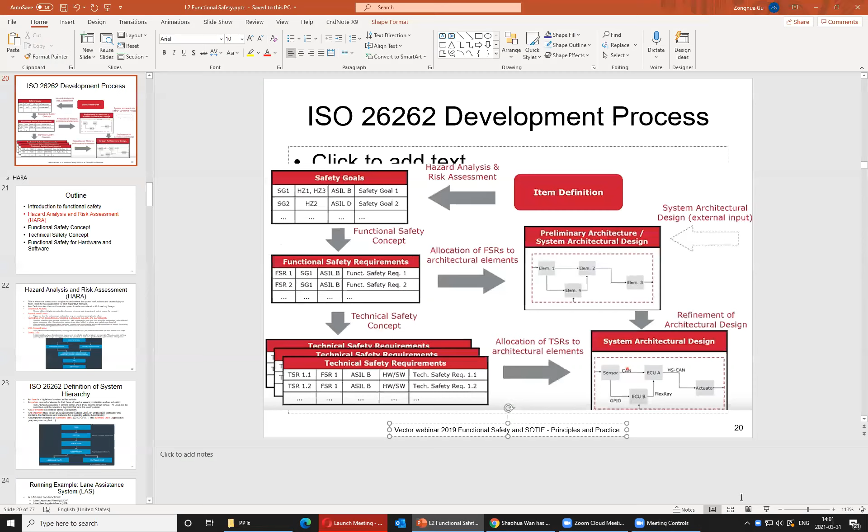Okay, so let's start lecture number 2. There's a little bit left from last lecture, lecture number 1.

First, we set up an exam time. If you go to the TimeEdit schedule, I added May 31st as the exam date, 9 to 11. And August 19 is the re-exam date. So if you did not make the exam in May, you may choose to test in August. The other classes are not entered in TimeEdit because it's quite tedious - you'd have to enter each one manually by hand. I think it's not necessary as long as you know the time is Monday, Wednesday. So I just added the 2 exam dates.

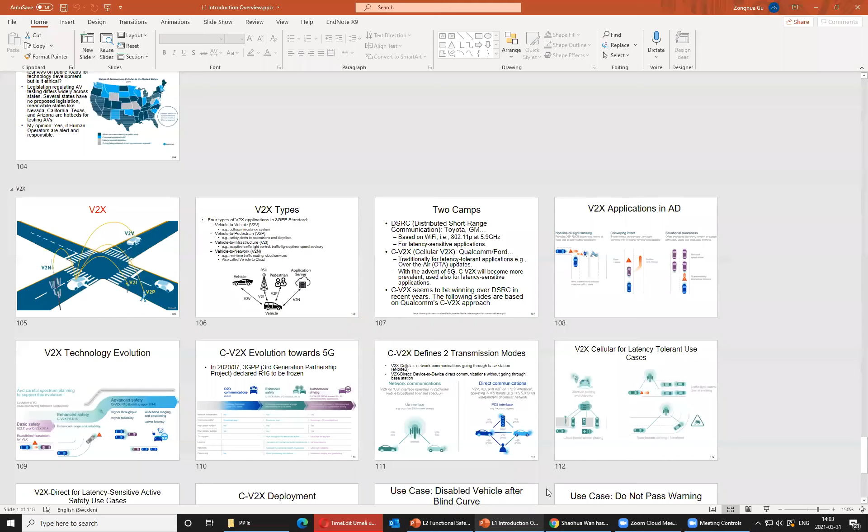So, are there any questions on the exam or last lecture's material? Okay, so let's continue.

We have one last section in introduction and overview, that is V2X. So V2X communication - in the 3GPP standard, there are 4 types. One is vehicle-to-vehicle communication, for example collision avoidance systems. One is vehicle-to-pedestrian, V2P communication, for example safety alerts to pedestrians and bicyclists - specifically vehicle to mobile phone, mobile device.

Vehicle to infrastructure, that's V2I communication - for example adaptive traffic light control, traffic light optimal speed advisory. So for example, if there's a road where in one direction there's a lot of traffic but in the other direction very little traffic, then with a normal traffic light that switches periodically, the busy road will get interrupted periodically. But if you have V2I communication and change the lights only when the other direction has a vehicle coming, you can be much more efficient.

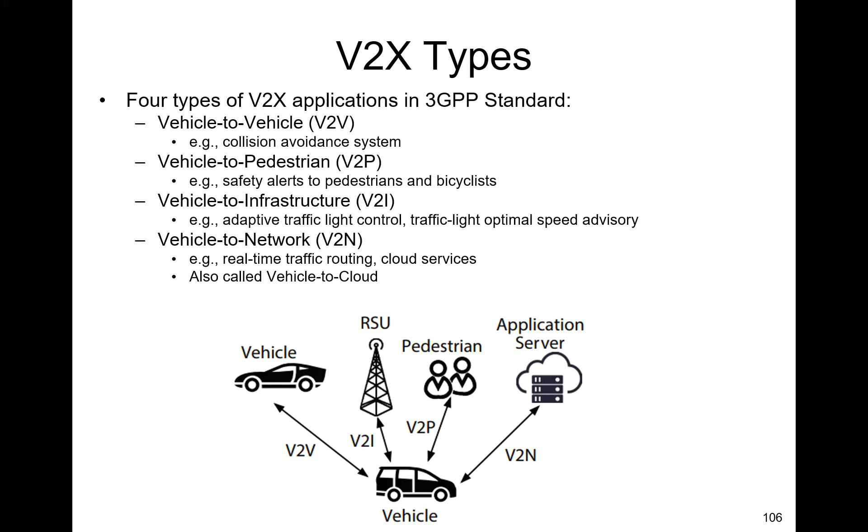There are essentially 2 camps in V2X. One is based on Wi-Fi, which in IEEE standard is 802.11p, operating at 5.9 gigahertz. The standard is called DSRC, Dedicated Short Range Communication, mainly adopted by Toyota and General Motors. Because it's point-to-point communication without going through a base station, it's useful for latency-sensitive applications.

Cellular V2X, CV2X, is mainly supported by Qualcomm, Ford and others. Traditionally it's for latency-tolerant applications, for example over-the-air updates - updating your vehicle's software from over-the-air software patches. These can be done non-real-time, maybe while the car is parked.

So traditionally, you think of CV2X as slower because the communication goes through a remote base station. Think of your own mobile phone - if it's using a cellular connection, then all the signals go through a remote base station in a cellular network. Whereas if you're in a room with Wi-Fi, the communication is local.

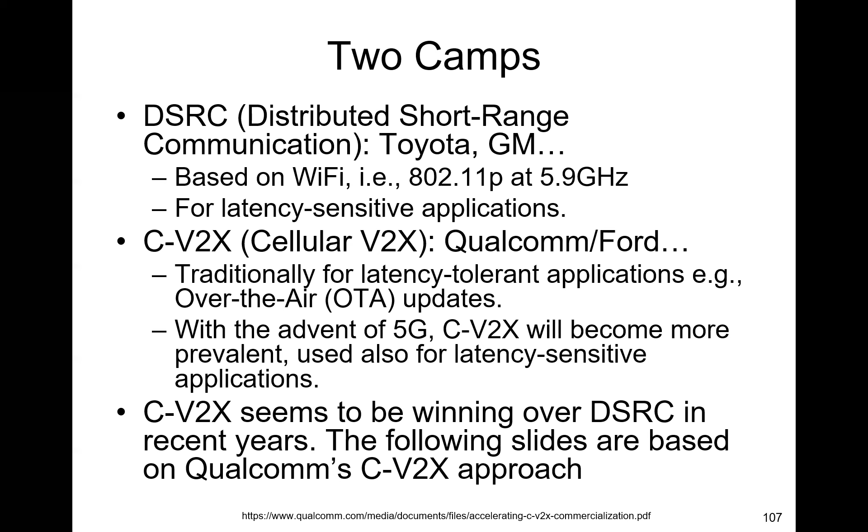The following slides are based on Qualcomm's CV2X approach. In autonomous driving, V2X can have many applications. One is non-line-of-sight sensing, which provides 360 degree NLOS awareness, and works at night and in bad weather conditions.

That's when you cannot see the other vehicle. Suppose this is your ego vehicle, and there's another vehicle, maybe there's a tall building in the corner that prevents you from seeing that vehicle directly. Or maybe a pedestrian crosses the road suddenly - they're called vulnerable road users. If you have V2X communication, you can receive an alert, either V2V or V2P, and then either the driver or the automated vehicle itself can take emergency maneuvers.

The other application is conveying intent - sharing intent, sensor data, and path planning information for higher level of predictability. Here, the blue car is your ego vehicle, and there's a road hazard, maybe some obstacle on the road that you cannot see directly, but the car in front sees it and makes a sudden lane change. Without V2X communication, you'd have to make a sudden lane change too. But with V2V communication, the front vehicle can tell your ego vehicle there's an obstacle ahead and you can change lanes early.

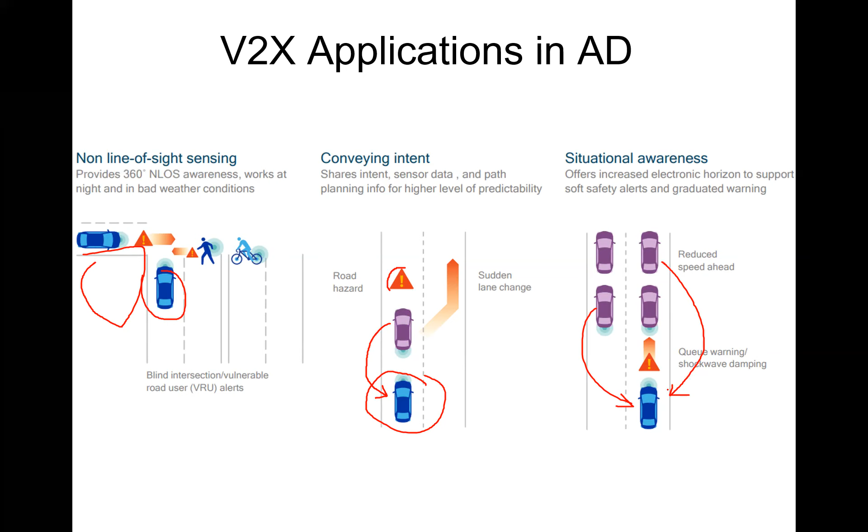V2X technology evolution started with basic safety messages - basically collision avoidance over either Wi-Fi, that's the 802.11 standard for Wi-Fi, or CV2X release 14. Enhanced safety, that's CV2X release 14/15, features enhanced range and reliability - the range is extended to maybe over 100 meters and more reliable. Then release 16 offers advanced safety, higher throughput, higher reliability, wideband ranging and positioning, and lower latency. This is essentially 5G.

Last year in July, the 3GPP, the third generation partnership project - essentially a consortium of industry, telecom industry, and technology companies - declared release 16 to be frozen, finalized. This is a table comparing release 12/13 to 14 up to 16. Release 12/13 is for basic device-to-device communication - it has limited network independence, limited high speed, no high density, and so on.

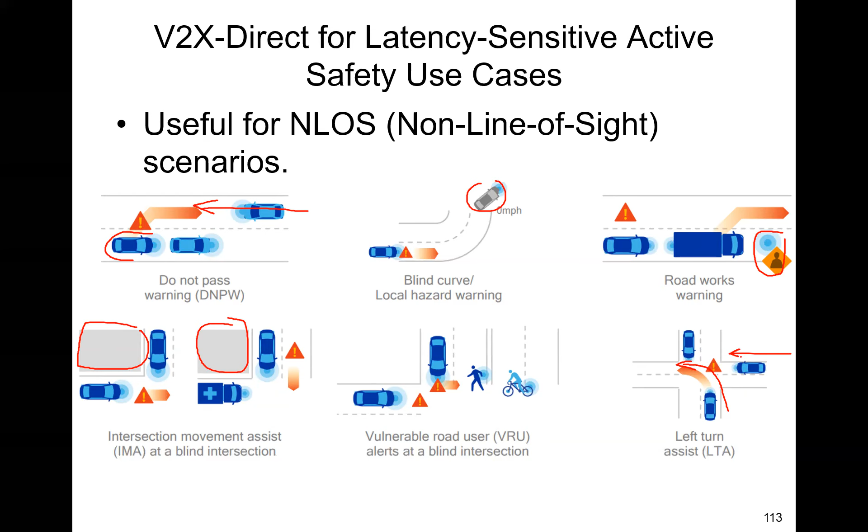So all of these are non-line of sight scenarios. So for deployment, it's a combined use of roadside units.

For example, traffic lights, these are traffic lights, with direct link interface for V2X direct. So this purple interface is the roadside units with direct link, also called PC5 interface. It allows direct communication between the vehicle and the roadside unit, so between this and this.

And 4G, 5G base stations for V2X cellular, benefiting from cellular network densification in 5G with smaller and denser cells. So the green interface is the 4G, 5G small cells with UU interface. That's more of a traditional base station, pretty tall, on a tall pole. And then in 5G, you may have so-called nano base stations, very small base stations spread densely in the area.

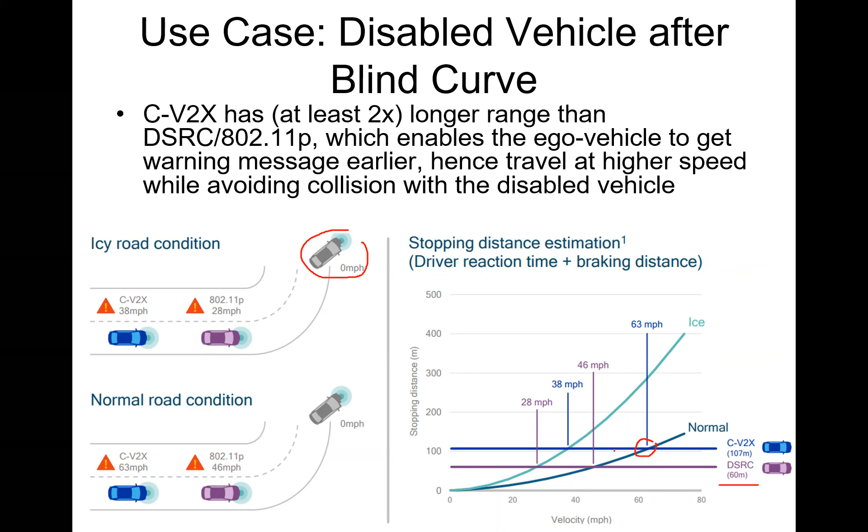So in conclusion, in summary, 5G accelerates AVs. For autonomous vehicles, you can have V2X wireless communication as an additional sensor, in addition to camera, LiDAR, and radar. You may have 3D HD maps with V2 cloud connectivity. You may have heterogeneous connectivity with cellular, Wi-Fi, and in-vehicle CAN Ethernet, and this enables onboard intelligence.

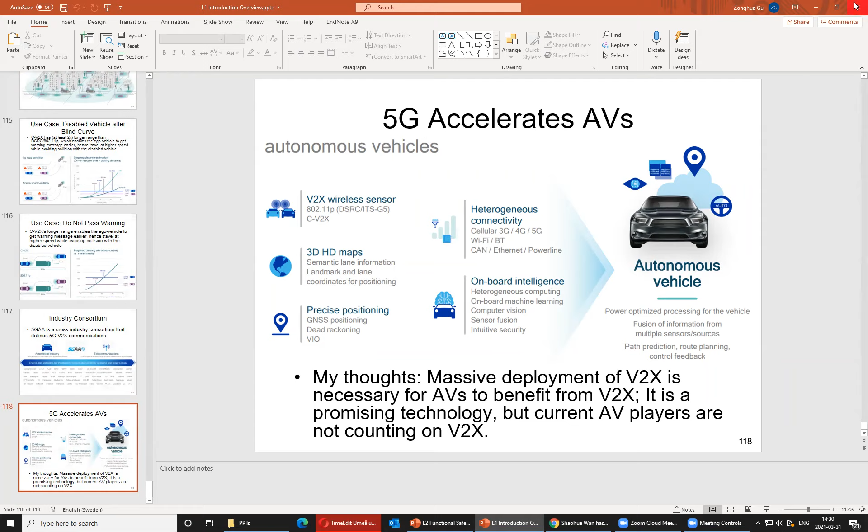Okay, so let's close this first lecture and move to lecture 2 on functional safety.

For this lecture, I took a lot of material from Udacity's self-driving car engineer nanodegree. So let me do a little advertisement because I use their material.

Udacity has this nanodegree program for self-driving cars. It's not free, it's actually quite expensive, $2,000. So it's pretty well known in industry. If your goal is to become a self-driving car engineer, this course can be very useful because many employers know it. They often ask applicants, did you take the course or not? So because so many people took it and got a job, this course is pretty well known in industry.

From my perspective, I looked at the course material, and it's very practical, very hands-on, but it's also a little bit out of date. It addresses many classic techniques in terms of computer vision, sensor fusion, planning, control, and so on. But it lacks adequate coverage of machine learning and deep learning, the latest topics. So if you're aiming to get practical knowledge about what engineers really do in industry, this course can be very useful. But if you're a PhD student or doing research, maybe these covered topics are too old.

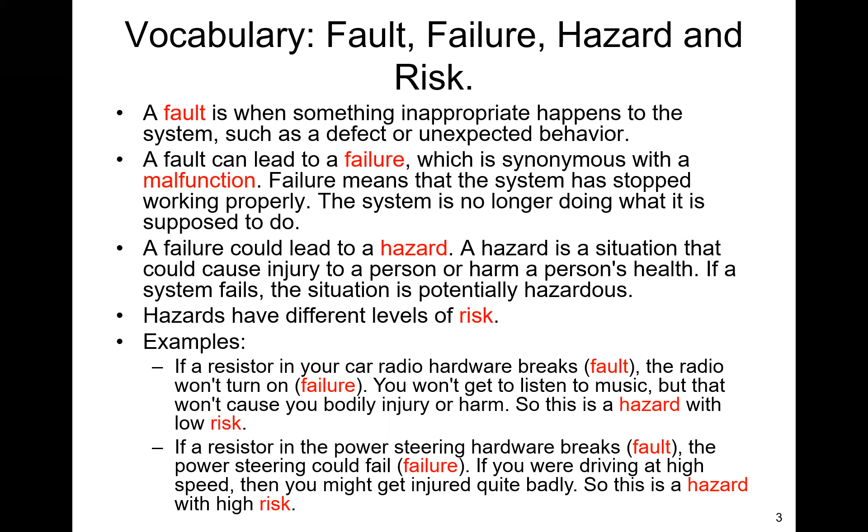The notions of safety in the automotive context—there are many notions. One is functional safety, which is the topic of this lecture. It's when hardware or software is not working according to specification. One is safety of intended functionality, SOTIF. That's a hazardous situation due to lack of specification. So functional safety is more related to traditional hardware-software failures, if a resistor is broken or there's a soft error due to failing, aging hardware, whereas SOTIF is more relevant to AI and machine learning.

For example, if Tesla's car cannot recognize a white truck and hits it, that's a failure in the SOTIF sense, because the hardware in the car did not fail—it's the function that's not working properly for a given input. So I will mainly discuss functional safety in this lecture, but I'll also briefly mention SOTIF at the end, because SOTIF is relatively new, whereas functional safety is very old, way before autonomous driving. But SOTIF was discussed to respond to the new requirements due to autonomous driving.

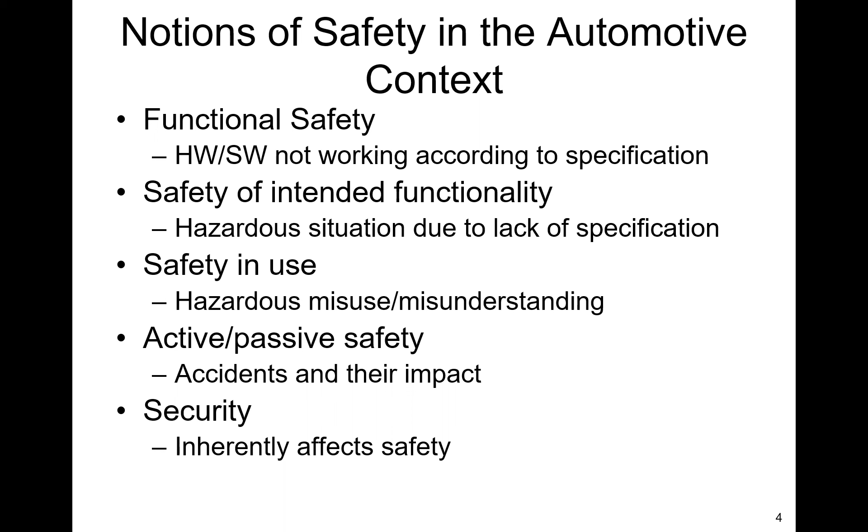Functional safety comes from a branch of systems engineering called requirements engineering. It separates requirements into functional and non-functional requirements. Functional requirements say what your system is supposed to do, in the form X system shall do Y.

You see the word 'shall' a lot in the functional safety literature. For example, the turn signal system shall turn on an indicator light telling the driver that the system is active. That's one example of a functional requirement.

Whereas a non-functional requirement addresses how the system should behave, for example how reliable is the system, with the form X system shall be something. For example, the turn signal system shall be available when the vehicle ignition switch is in the on position.

So it doesn't specify the function of the turn signal system, only its availability at a given time. So it's not a functional requirement, but a non-functional one.

Functional safety looks at what happens when the system does something it was not supposed to do, which is called a malfunction. So you'll be adding new engineering requirements to the vehicle design in order to ensure safe systems.

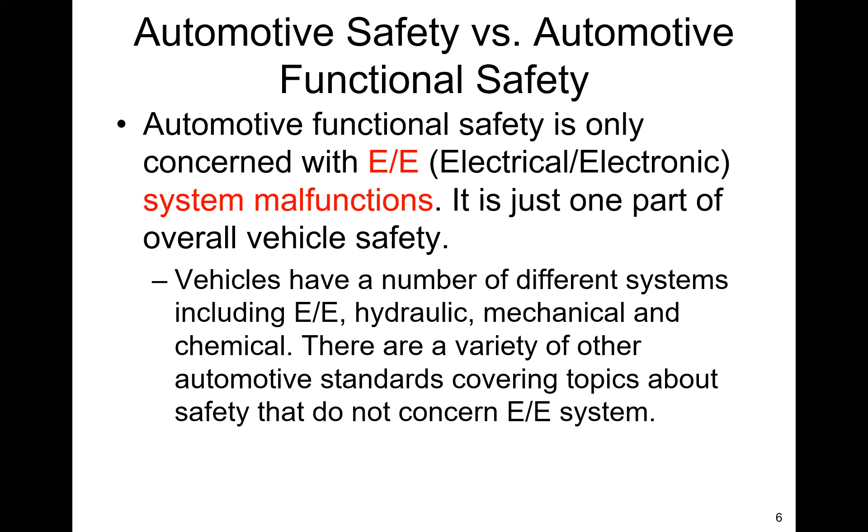Functional safety does not look at nominal performance. Nominal performance issues can lead to safety problems, but nominal performance is not part of the functional safety standard.

For example, nominal performance of the automatic braking system could be: a vehicle traveling at 60 miles per hour should come to a complete stop in 5 seconds. Whereas functional safety does not determine whether or not the vehicle brakes within 5 seconds.

It looks at malfunctions, such as if the braking function is not engaged when it's supposed to, or if the braking function is engaged when it's not supposed to, or if the system is braking too hard, causing injury to the driver.

It's not about the quantitative performance, but about malfunctions, something that doesn't work.

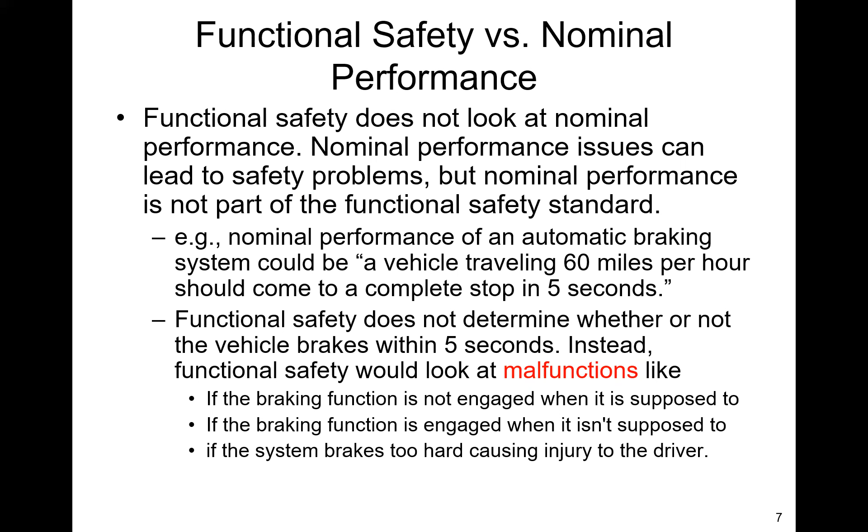So here's a quiz. Which of the following is part of a functional safety analysis? First, the mechanical seatbelt restraint system could fail and the passenger would be injured in an accident. Second, testing to see if the backup camera actually meets its technical specifications of a depth perception of 20 feet, and so on. So the answer is number 3.

There's a potential that a software error could cause the parking brake to engage at high speeds, so it's a malfunction of the EE system. Whereas for the first one, it's a malfunction of a mechanical system. For the second one, it's a performance specification of the camera system. The camera system is part of the EE system, but this particular statement addresses the performance, not the malfunction.

Number 4, the car battery might catch on fire because of a chemical reaction. So it's a chemical subsystem, not the EE subsystem.

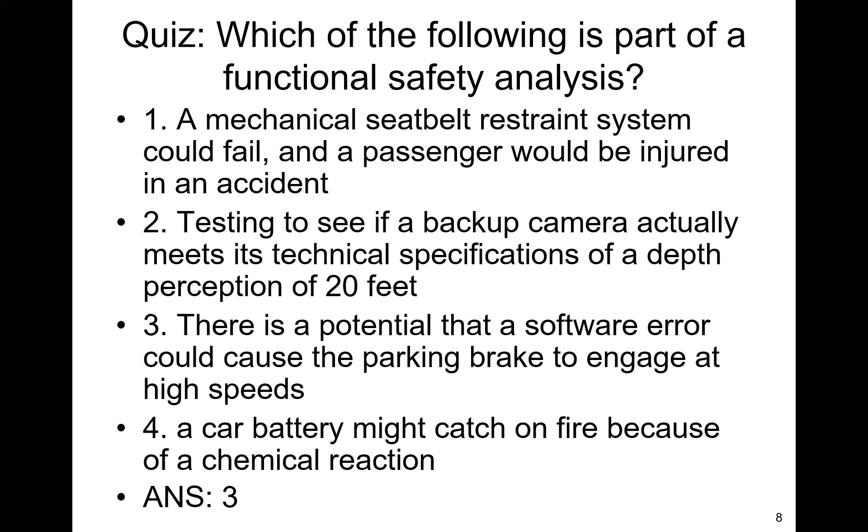So in functional safety analysis, safety is defined as absence of unreasonable risk. Functional safety analysis identifies high-risk situations and lowers risk to reasonable levels. It has 3 steps.

One is to identify hazards in the passenger vehicle's EE system that could cause physical injury or damage to a person's health, and evaluate the risk of the hazardous situation so that we know how much we need to lower the risk. And finally, via systems engineering, prevent accidents from occurring by lowering risk to reasonable levels.

So what level of risk is reasonable? It really depends on society's current threshold. For example, the history of seatbelts provides a great example of how society measures risks.

It took almost a century for countries to require seatbelt use. The automobile was invented in 1885 by Benz, and seatbelts started appearing in the 1920s. In the 1950s, car companies offered seatbelts as optional equipment. And finally, in 1968, the United States passed laws requiring all vehicles to come with safety belts.

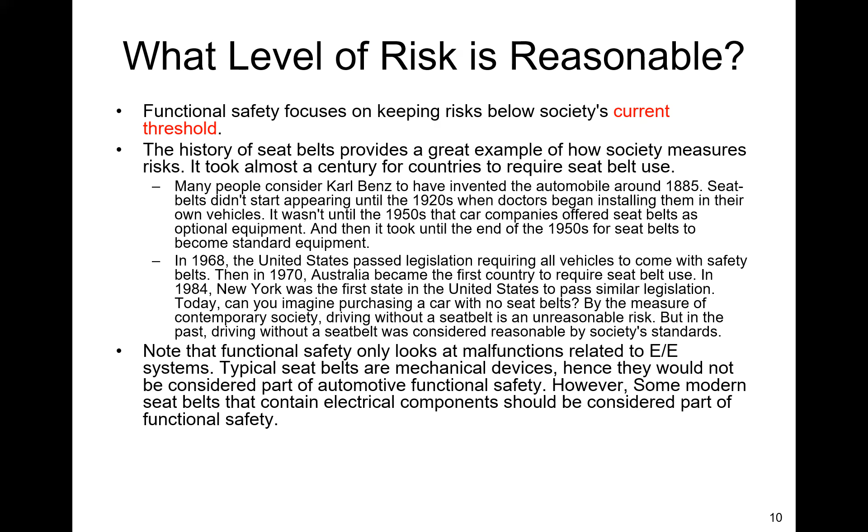Typically seatbelts are mechanical systems, so they're not part of the functional safety coverage, but some parts of the seatbelts may be electronic, so they should be considered as part of functional safety.

So identifying hazards, there are three general causes for accidents. One is human error. The National Highway and Transportation Safety Administration estimates 94% of car accidents in the USA involve human error. One is technology error, for example, software bugs, hardware failures, and so on. And one is human technology interaction error.

So whenever a human and a machine share control of a vehicle, of a system, extra care must be taken when evaluating safety. The boundary between what the human is supposed to do and what the machine is supposed to do needs to be clear. Drivers need to understand the warning signals coming from ADAS systems. Interfaces need to make it clear when the vehicle expects us to take over.

Some companies, such as Waymo, have argued that low levels of automation are not safe. Since it's unrealistic to expect drivers to keep their hands on the steering wheel and be prepared to take over for long durations of time. So, for example, Tesla has L2 automation, and in their user's manual, they say that the driver must be alert and be ready to take over at any time.

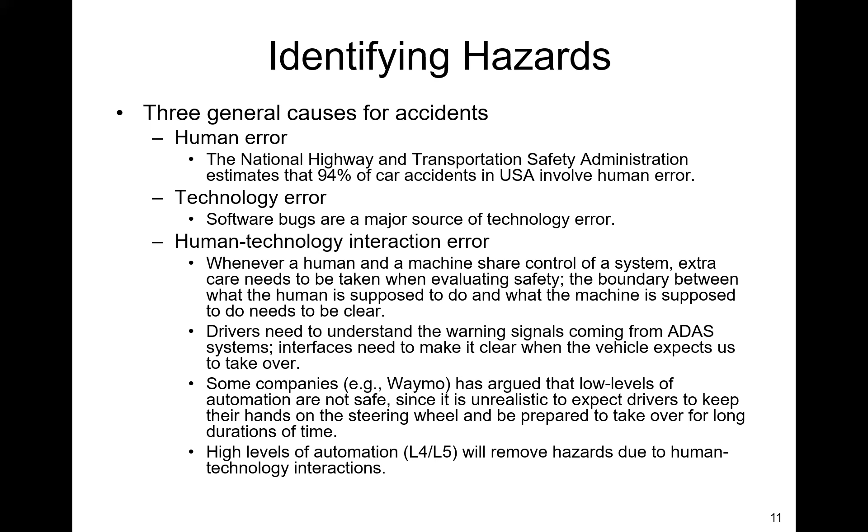So the ISO 26262 standard, which is the functional safety standard for automotive systems, defines 4 ASILs, automotive safety integrity levels, A to D. D represents a hazardous situation with the highest risk, whereas A represents lower risk. There's one more level of risk below A called QM, quality managed, which means that development of this subsystem according to accepted quality principles is sufficient to reduce risk.

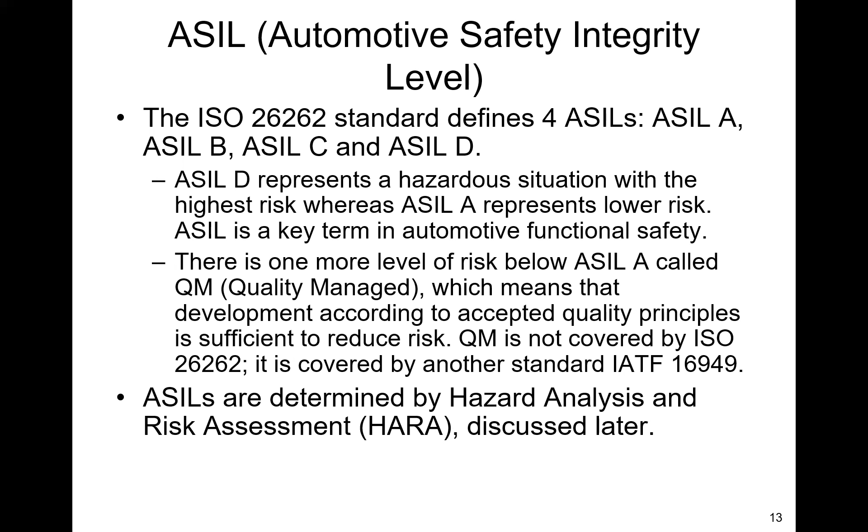So how do you evaluate risk? It's defined in the functional safety context as probability of occurrence times severity of the harm. Probability of occurrence refers to how often a driving situation occurs. For example, driving on a snowy mountainside road has a relatively low probability of occurrence, whereas for city driving, the probability is high.

Well, unless you live in the mountains, but I guess most of us live in the cities. So severity of harm refers to how bad the injury is. For example, a power steering malfunction may cause fatal injury for driving on a snowy mountainside with a severity of 4, but unlikely with no injury for city driving with a severity of 2 due to the low speed. So therefore, risk of power steering malfunction for driving on a snowy mountainside is calculated as 2 times 4, which is 8.

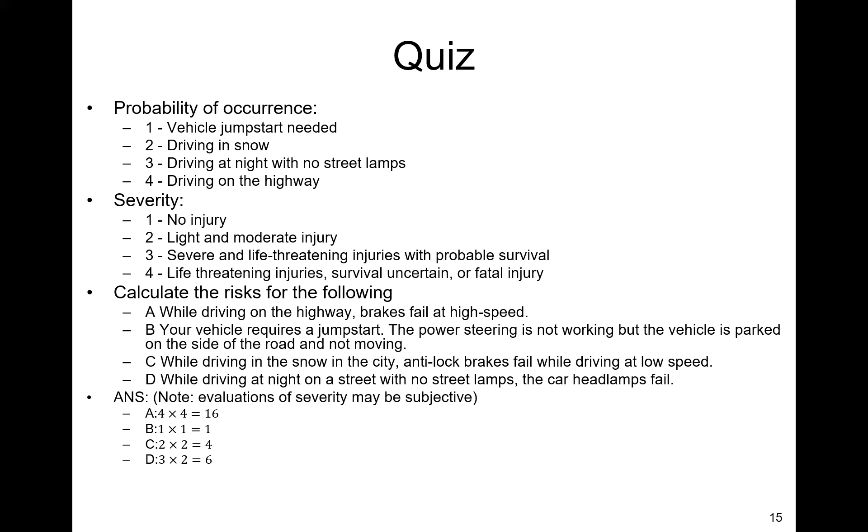So, reducing risk with systems engineering. This is the V model for systems engineering, from requirements engineering on this side, to systems architecture design, allocating requirements, testing and verification, and finally system integration. This is the classic V cycle, especially if you work in the automotive industry. As an engineer, you should be very familiar with this V cycle.

The top part of the V represents the entire vehicle as a single system. As you traverse down the left side, you focus on smaller and smaller subsystems. As you go up the right side, you integrate your subsystems into larger systems. At the top left, you start from a bird's eye view of the entire vehicle and gradually split into subsystems such as climate control, entertainment system, steering system, braking system, and so on. Then you define requirements and system architecture for each subsystem.

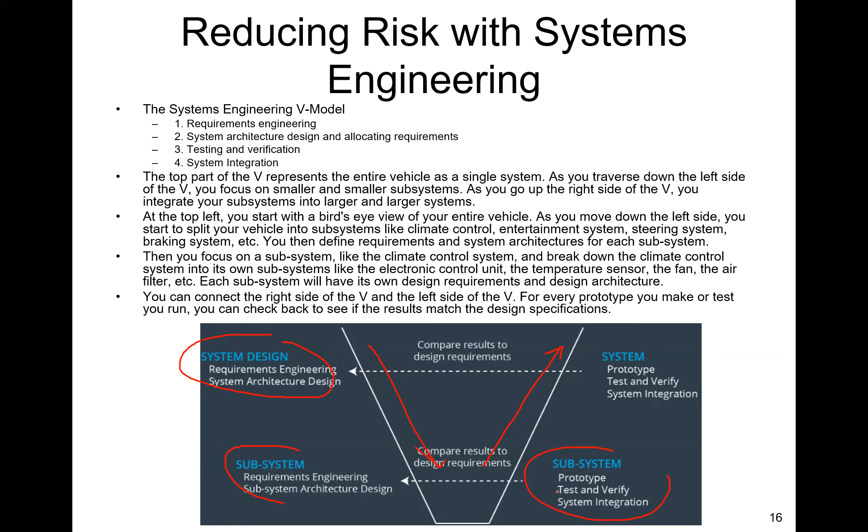Here's another view of the V model. ISO standard compliance is not legally required, but highly desirable. Higher up in the V model represents integrated systems, so you have the flat-down, flat-up, and flat shape.

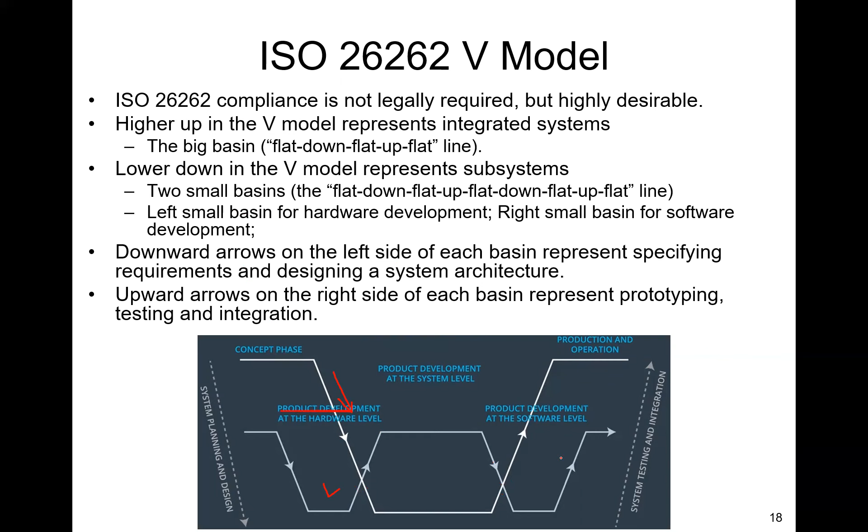You can flatten the V model to a more linear perspective. Here you can see the concept phase, the product development phase, and the after-release-for-production phase.

In the concept phase, you mainly perform HARA, hazard analysis, and then design the functional safety concept. After the requirements are done, you perform actual development at the product development phase, both for hardware and software. Then you perform safety validation and functional safety assessment, and release to production. Finally, after production, you have operation and service, and decommissioning — that is, going to a junkyard.

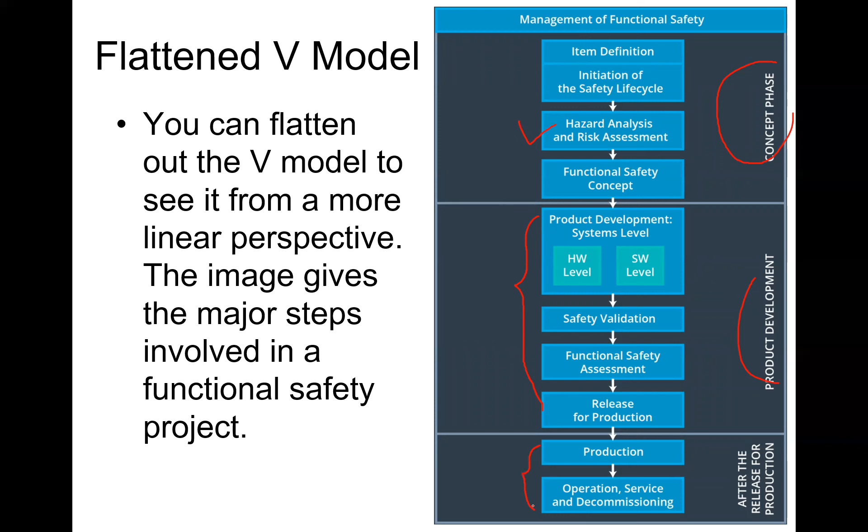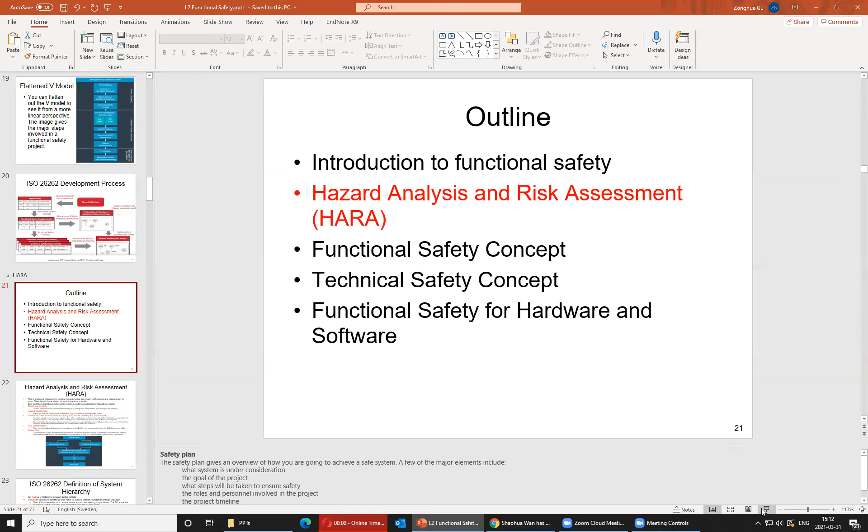So HARA, this is where we brainstorm and imagine hazards where the system malfunctions and causes injury or harm. Then you calculate the risk for each hazardous scenario. It has 5 steps.

One is situational analysis: choose the driving scenario, like driving on a bumpy road, being towed, or driving on a freeway. Hazard identification: identify how the system could malfunction, for example electronic parking brake failure. Hazardous event classification according to exposure, severity, and controllability.

Take a malfunction and think about it under different driving scenarios, like if the electronic parking brake failed while the vehicle was parked on a steep hill. So that could be a hazard. Then calculate the 3 metrics, exposure, severity, and controllability, and determine the ASIL.

ASIL determination. Finally, safety goal: the type of engineering requirement for vehicle functional safety. For example, the electronic parking brake system shall always be engaged when the vehicle is in park on a gradient that's greater than 10 degrees.

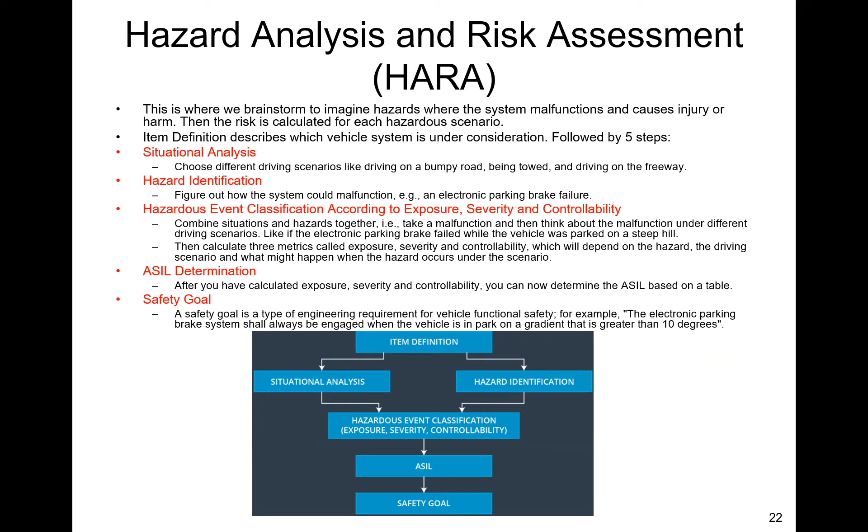So first, some basic terminology. An item is a high-level system in the vehicle. A system is a set of elements that have at least a sensor, controller, and an actuator. For example, the lane assist system, LAS, has 2 sensors: one is the camera, one is the driver steering torque sensor. The ECUs are the controllers, and the actuator is the motor that turns the steering wheel.

A subsystem is a smaller piece of a system. A component, maybe an ECU, an embedded computer that contains the hardware and software for specific functionality. A component consists of hardware parts and software units.

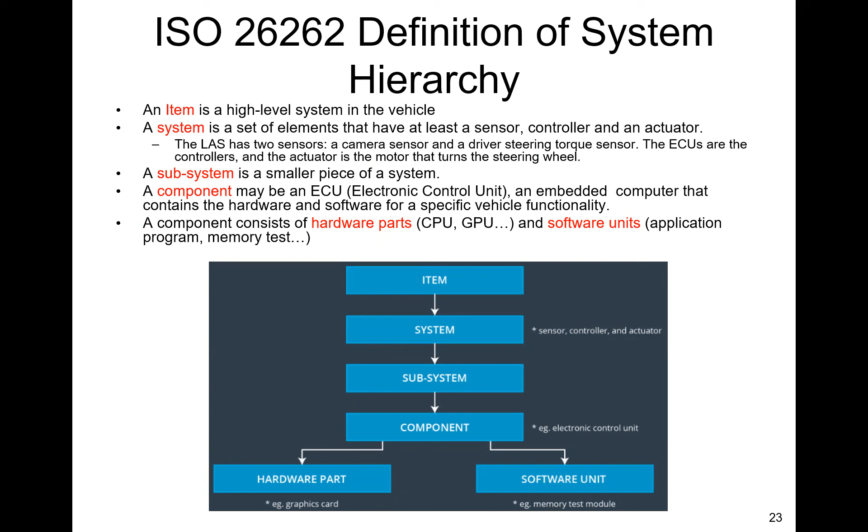So here's an example lane assistance system with 2 functions: one is lane departure warning, one is lane keeping assistance. If a driver departs a lane without using a turn signal, the system assumes that the driver has become distracted and did not mean to leave the lane. Two things will happen. First, the LDW function will vibrate the steering wheel to provide haptic feedback to remind the driver that they're deviating from a lane.

The LKA function will move the steering wheel so that the wheels turn towards the center of the lane in order to stay in the lane. So LKA is more active, it's an active safety feature. You can assume that these engineering requirements come from a product engineering team, and the safety engineer's job is to add extra requirements to ensure safety.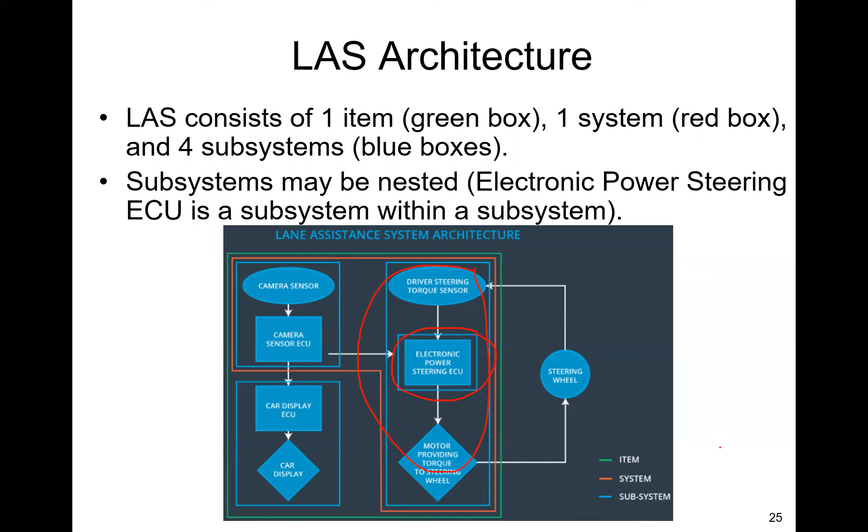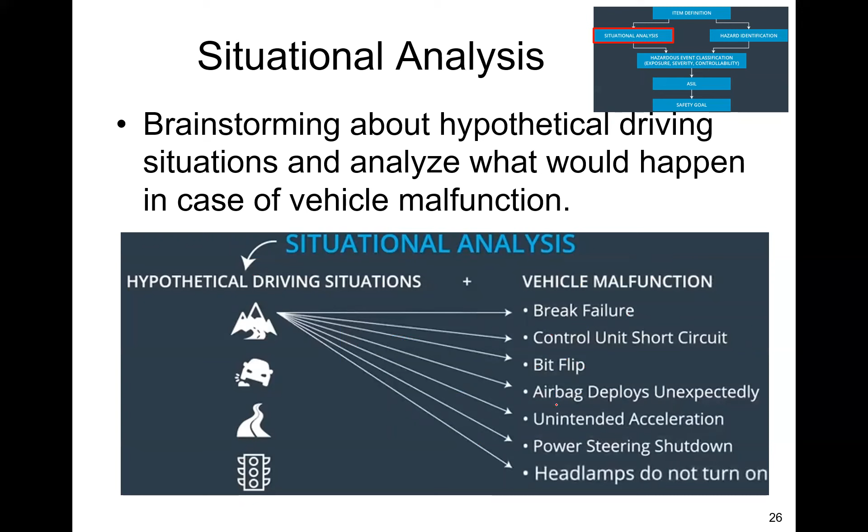So situational analysis, this is where engineers brainstorm about hypothetical driving situations and analyze what would happen in case of vehicle malfunction, for example brake failure, control unit short circuit, bit flip, airbag deploys unexpectedly, and so on. You use a set of predefined guide words to help unify terminology. Here, deviation guide words include function not activated, function unexpectedly activated, function always activated, and so on.

So for example, operational mode, operational scenario, during environmental details, with situational details, and item usage system. You can replace each word in the parentheses with, say, backward driving on city road. So backward driving is operational mode, city road is the scenario, during fog is environmental details, situational details are low speed, and item usage is correctly used system.

So that's one scenario. For our lane assistance example: normal driving on a highway during rain, slippery road, with high speed, and correctly used system.

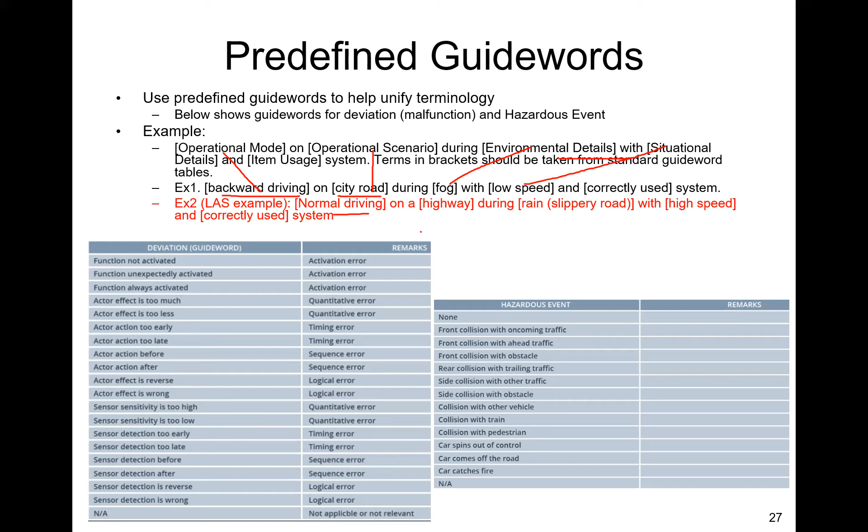The function for LDW is that it should apply an oscillating steering torque to provide the driver haptic feedback. So if you have this function in your car, if you deviate from your lane, your steering wheel will vibrate and remind the driver.

The malfunction is that the actor effect is too much. That is, when the oscillating torque is too high, the oscillation can actually cause the vehicle to veer and collide with other vehicles. So the haptic feedback being too large can affect the driver's ability to steer as intended, causing loss of control and collision with another vehicle or road infrastructure. In summary, LDW applies too high an oscillating torque to the steering wheel above the limit. So this is a hazard.

For lane keeping assistance, this function moves the steering wheel so that the wheels turn towards the center of the lane to keep the vehicle in the lane. Malfunction is when the driver takes both hands off the wheel - that's when the driver overtrusts the technology. LKA is not designed for that; it's designed for assisting the driver, not replacing the driver.

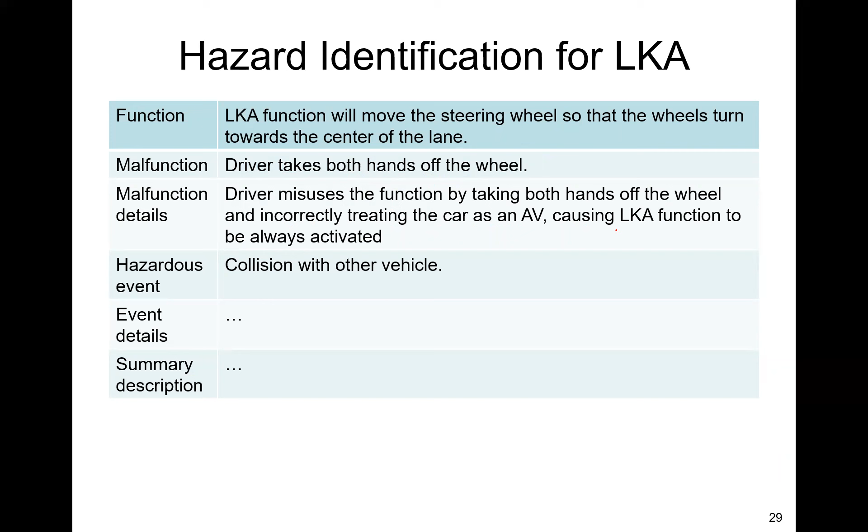In the ISO 26262 standard, risk is defined as risk equals severity times exposure times controllability. Severity is the same as the severity we discussed before. Exposure corresponds to probability of occurrence. Controllability is new in ISO 26262 compared to traditional functional safety - it measures how likely the driver could regain control of the vehicle.

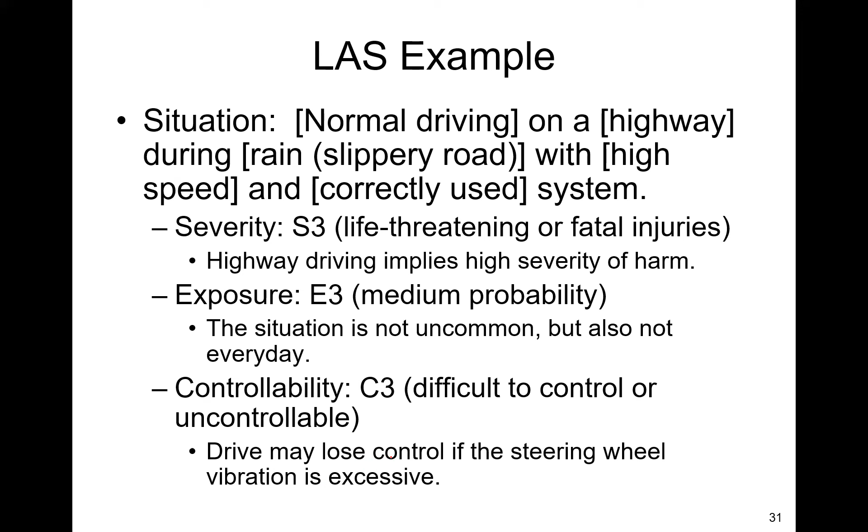For example, normal driving on a highway during rain, slippery road with high speed and correctly used system: severity is S3, because highway driving implies high severity of harm. Exposure is E3, medium probability - not uncommon, but also not every day. Controllability is C3 - a driver may lose control if the steering wheel vibration is excessive. Then you determine the ASIL level of the LDW function as ASIL C, because there's a table in the standard mapping S3, C3, and E3.

So you may look at other driving scenarios. For example, driving on a wet road on a city street at low speed. Now you can determine severity as pretty low, exposure is medium, and controllability is C3 - you may lose control. But because the severity is low, the ASIL level, checking the table, is A. So the risk has gone down due to the low speed.

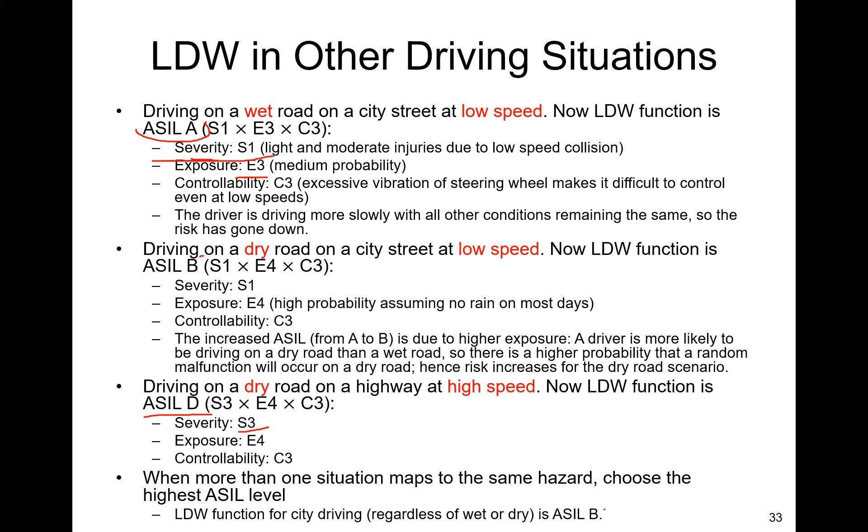It's important to notice that ASIL is not equivalent to importance. A high ASIL function is not necessarily more important than a low ASIL function. And importance is not even a formally defined concept in the standard.

Consider two safety functions. Safety function 1 is ASIL-C due to severity 2, exposure 4, and controllability 3. Safety function 2 is ASIL-B due to severity 3, exposure 2, and controllability 3. So SF2 is assigned a lower ASIL of B due to its low exposure, but its severity is higher than SF1's. So malfunction of SF2 may cause more severe harm than malfunction of SF1, but because it's less frequent, exposure is lower, so it gets assigned a lower ASIL than SF1.

So a low ASIL function may be very safety critical. In general, higher ASIL levels require more analysis and testing to reduce risk to acceptable levels.

A few examples of extra measures include fault tree analysis for ASIL C and D. ASIL D requires hardware failure rate of less than 10 FIT, which is the number of failures expected in 1 billion hours of operation. ASIL B and C require 100, and ASIL A requires 1,000. So software units with ASIL D require more rigorous testing, like MC-DC coverage, whereas ASIL B only mandates DC coverage.

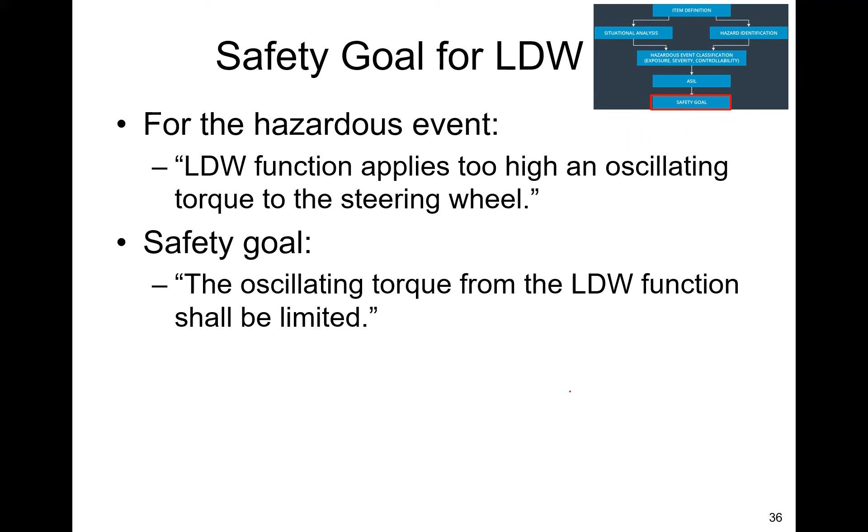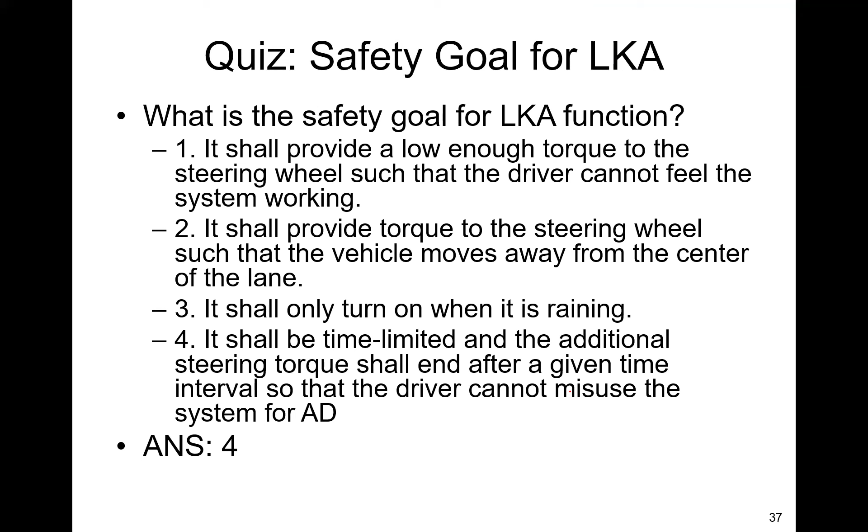Here's a summary of HARA. You start from the malfunction, that is the ABS system failure. Then you perform hazard analysis to identify what unintended situations could happen, for example, a loss of stability. Risk analysis asks: how likely is the hazard to happen? That is the exposure. How harmful is the hazard, the severity of the hazard? How controllable is the system if the hazard occurs? That's controllability.

Finally, you determine the ASIL based on the risk analysis, from A to D. There are a lot of specific methods for the failure analysis, which I will not go into the details of.

So that's HARA, and then the next step is the functional safety concept. In the standard, concept is synonymous with document. So it includes the following steps: derive functional safety requirements, refine the item architecture, allocate functional safety requirements to item architecture, and determine ASILs for the subsystems.

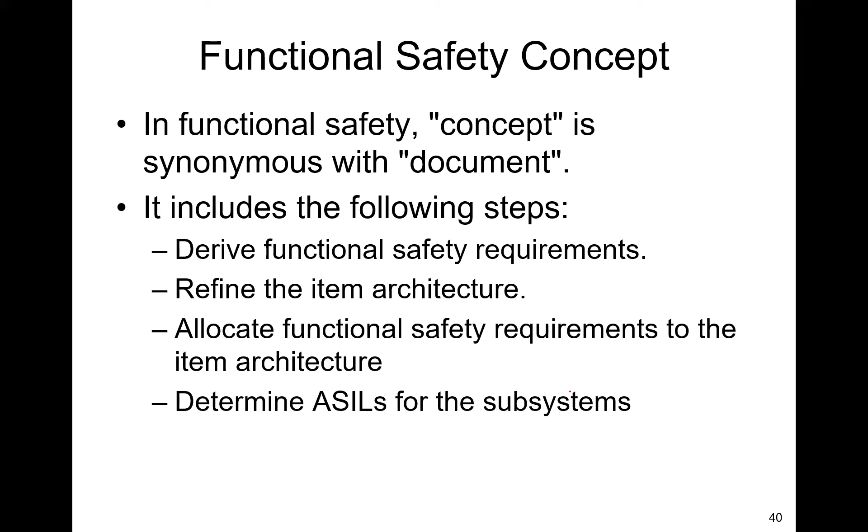Based on information from HARA, we identify 2 malfunctions for LDW. First, the LDW function applies an oscillating torque with very high torque amplitude above limit. Second, it applies the torque with a very high frequency, also above limit. And one malfunction for the LKA function is not being limited in time duration, which leads to misuse as an AD function.

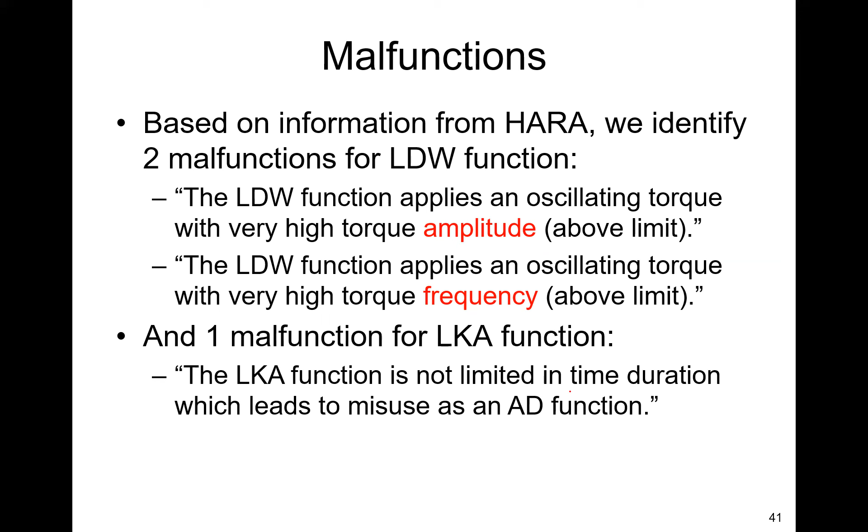And then you can perform a safety analysis to derive safety requirements, identify conditions and causes that could lead to requirements violations, and identify other hazards not identified in HARA. These include failure mode effects analysis (FMEA), HAZOP, FMEDA, FTA, and so on. These are all commonly used in industry for safety analysis.

But we'll just use some basic logic to derive requirements from the goals in this lecture. So functional safety requirements are based on the 2 goals we identified before. First is that the oscillating steering torque from the LDW function shall be limited. Second is that the LKA function shall be time limited, meaning the additional steering torque shall end after a given time interval so that the driver cannot misuse the system for AD.

Based on these 2 goals, we derive a few functional safety requirements. First, the lane assistance item shall ensure that the lane departure oscillating torque amplitude is below max torque amplitude, and frequency should be below max torque frequency. This is more specific than the safety goals — you explicitly define a threshold for amplitude and frequency. So that constitutes safety requirements.

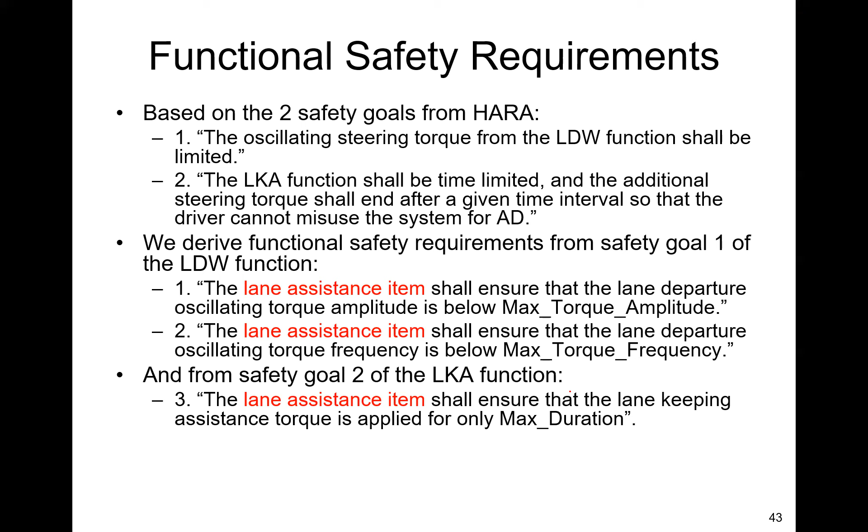So after you have the 3 requirements, you allocate them to subsystems. In this specific case, you allocate the 3 requirements onto the electronic power steering ECU. It shall ensure that the lane departure oscillating torque amplitude is below the max torque, frequency is below max frequency, and lane keeping assistance torque is applied for no more than max duration.

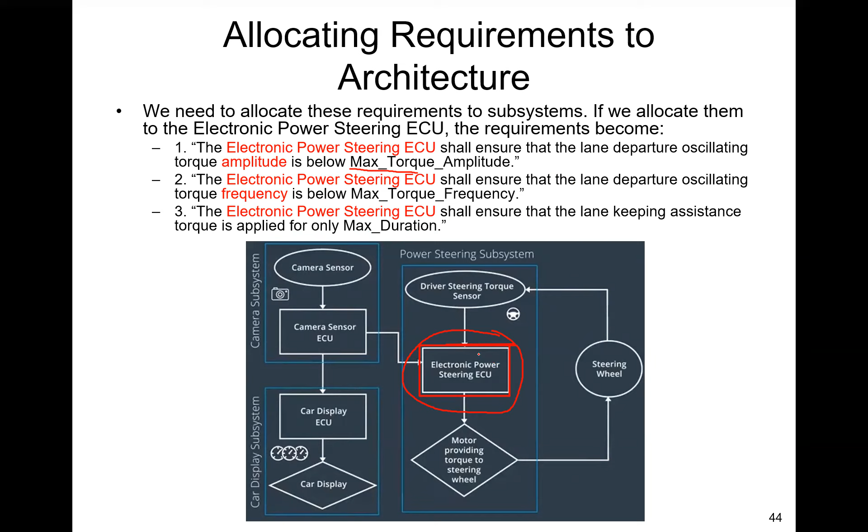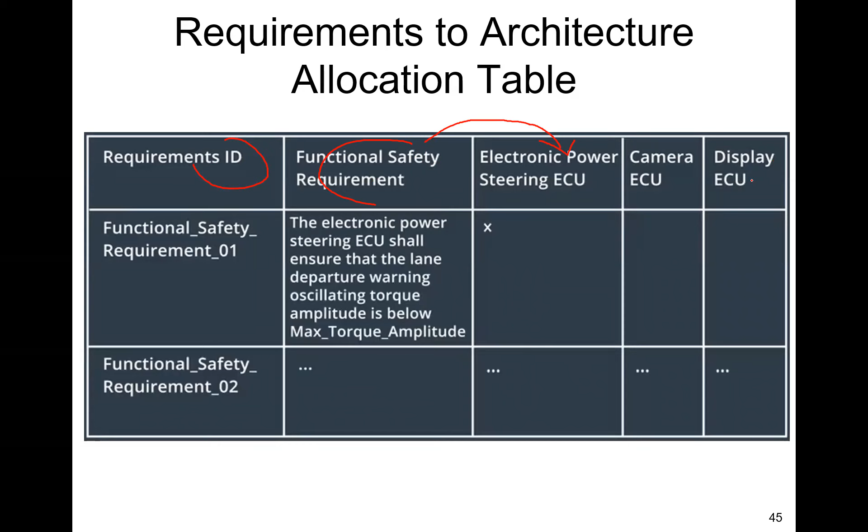So you make a table of which requirement ID, requirement detail is mapped to which element. Could be mapped, in this case, it's mapped to the ECU. You may also have other requirements mapped to camera ECU, display ECU, and so on.

So the 2 functional safety requirements inherit ASIL from the safety goal. We determined that this particular goal is ASIL C from exposure, severity, and so on. Now derived from this safety goal, you have the 2 requirements.

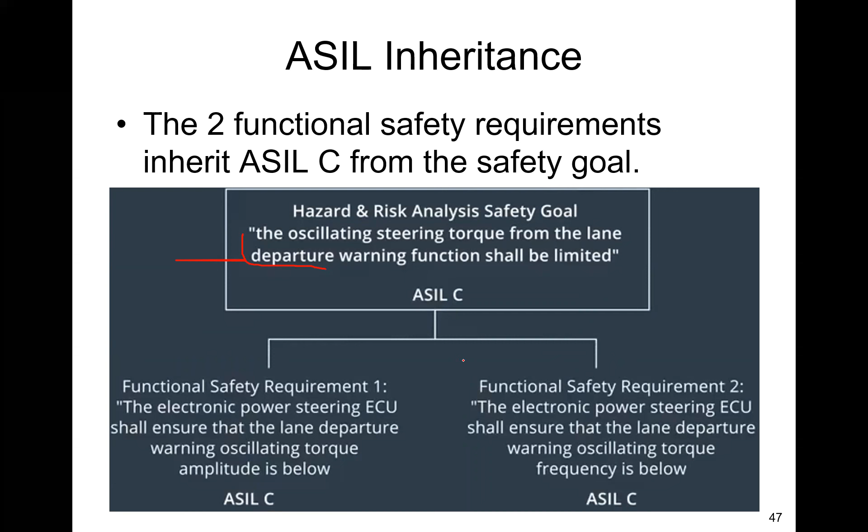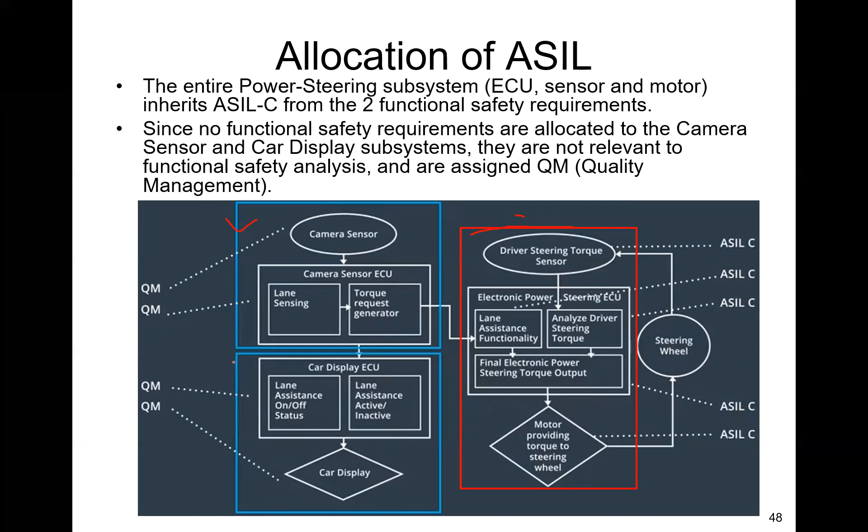They also inherit ASIL from the goal, and then you allocate ASIL to the specific subsystems. So the entire power steering subsystem, this red box here, inherits ASIL from the 2 functional safety requirements, because the functional safety requirement is mapped to the subsystem. It inherits the ASIL level from the requirements. Because in these 2 subsystems, camera and display subsystems, no functional safety requirements are mapped to them, so they're not relevant to safety analysis.

So they can be assigned QM, the lowest level.

So ASIL decomposition can be used to lower the ASIL level. For example, an ASIL D subsystem can be decomposed into 2 redundant ASIL B subsystems. If each ASIL B subsystem has probability of malfunction as 0.01, then the overall system has probability of malfunction when both subsystems malfunction, because they're redundant. When either subsystem works, the whole system works. Only when both fail does the whole system fail. Therefore, the failure probability of the overall system is the probability of both failing at the same time, which is 0.0001, much lower, assuming independent failure modes.

So that's the reason why you can decompose a high ASIL system into lower ASIL subsystems. It's also a motivation for sensor fusion. For example, if you're doing fusion of camera and LiDAR, and you're driving at night and your headlight malfunctions, the camera is no longer working, but the LiDAR still provides you with information. So that's also an example of decomposition into subsystems.

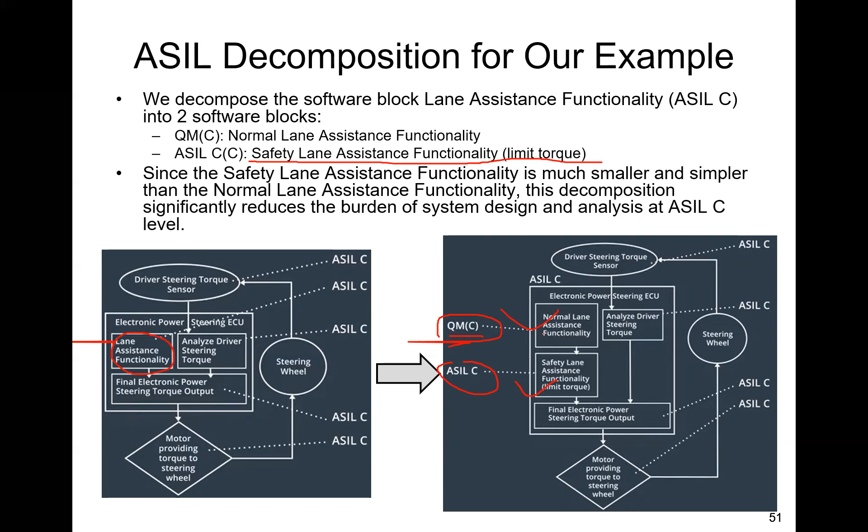From a real-time timing perspective, this fault tolerance time interval refers to the time it takes to detect and react to a malfunction. For example, for requirement 1, the lane departure oscillating torque amplitude is below a max torque amplitude threshold; the fault is when the torque amplitude exceeds the threshold. The safety state must be reached after a time interval FTTI, which equals a diagnostic test interval to detect the fault, plus the reaction time to react to the fault. So FTTI should not exceed the time until an accident could happen, say 50 milliseconds. It obviously depends on the car's speed.

So the warning and degradation concept is a document that discusses how the driver will be warned of a malfunction, and what the system will do to degrade the functionality, to take the system to a safe state and recover from a safe state. So gradual degradation versus turning the system off.

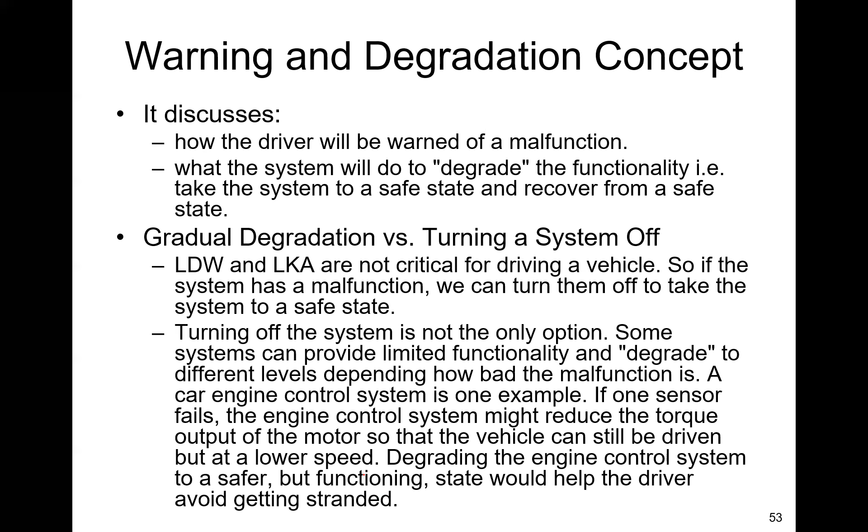For these two functions, LDW and LKA, they're not critical, so we can turn them off. But some systems can provide limited functionality and degrade to different levels depending on how bad the situation is. For example, a car engine control system: if one sensor fails, the system may reduce the torque output of the motor so that the vehicle can still be driven but at a lower speed. This helps the driver avoid getting stranded.

So in case of malfunctions, you may turn on the warning light to give the driver a warning. This is done by adding a separate software block, the lane assist malfunction warning, and a connection of safety lane functionality to it. This concerns the display subsystem.

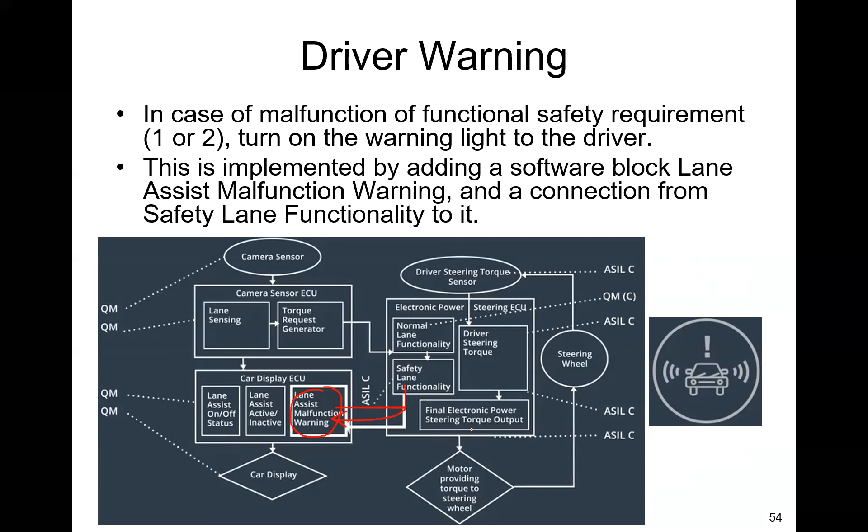So after we have finished with the functional safety concept, the next document describes the technical safety concept. That's when the concept phase is finished and the product development phase starts, and that's when you actually go into the development of hardware and software.

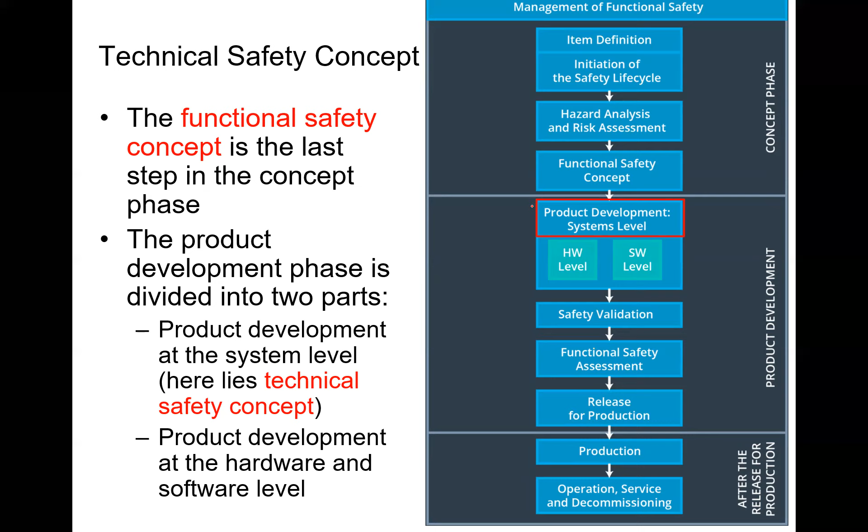So this concept involves two steps. One is turning functional safety requirements into technical safety requirements for each of the subsystems - camera, display, and power steering - and allocating technical safety requirements to the system architecture.

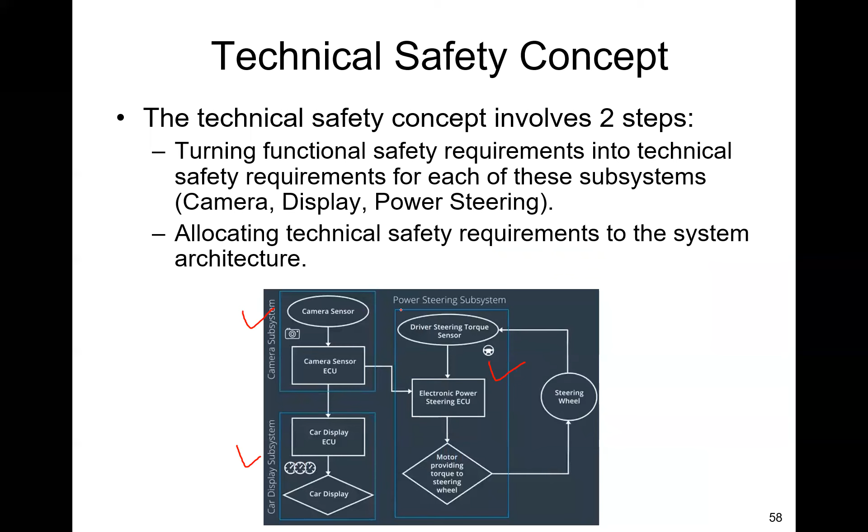So the technical safety requirement in this simple example, the only safety relevant element is the electronic power steering ECU. The other two, display and camera sensor, are not involved. So our technical safety concept will go directly to the ECU level. But in general, you may develop multiple technical safety concepts, one for each safety relevant subsystem. The figure shows how a technical safety concept may be divided into several documents for each subsystem.

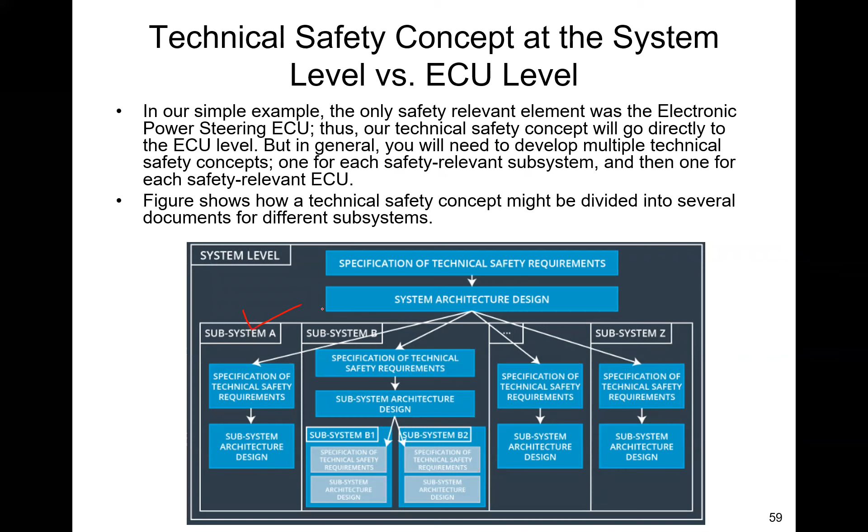So the functional safety requirement we discussed before is abstract and high level. For example, the lane keeping item shall ensure that the lane departure oscillating torque amplitude is below a threshold, whereas the technical safety requirement is more concrete and describes the signal flow and which component is in charge of the functionality. So the LDW safety component shall ensure that the amplitude of the LDW torque request sent to the final torque component is below max torque amplitude.

So this can be implemented by setting the LDW torque request to 0 if it exceeds max torque amplitude. But we're not concerned with implementation yet.

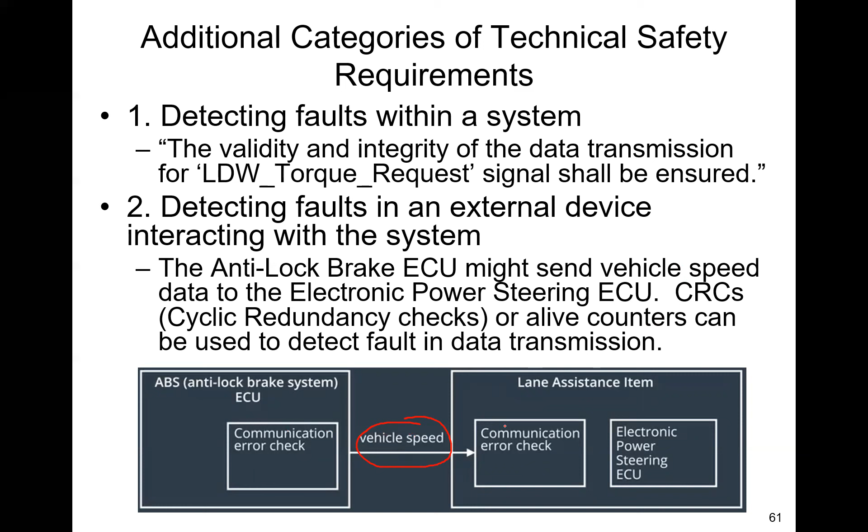And reaching a safe state - for example, as soon as a failure is detected, it shall deactivate LDW and set the torque request to 0.

Number 4 is implementing a warning and degradation concept. So as soon as the LDW is disabled, the LDW safety software block shall send a signal to the car display ECU to turn on the warning light to the driver.

Number 5 is preventing latent faults. So memory tests should be conducted at startup of the EPS ECU to check for any faults in memory. So that's an additional software component.

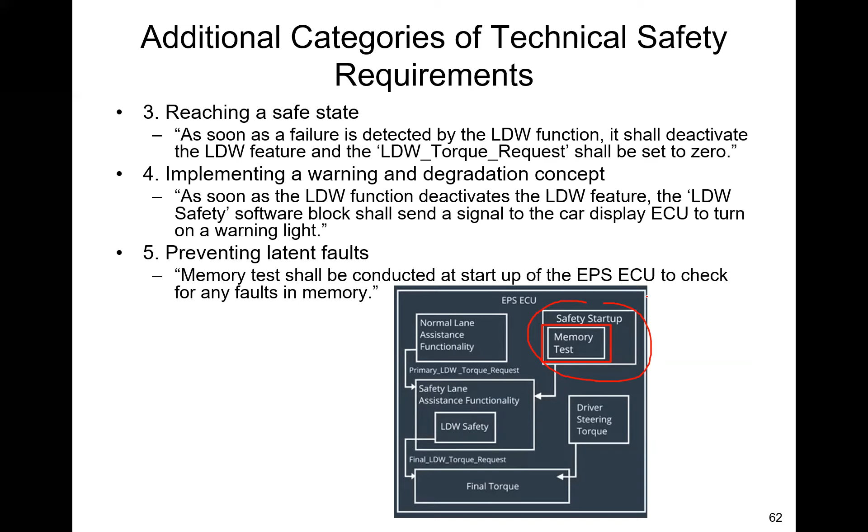So here's an example of a technical safety requirement. First, it inherits the ASIL from the corresponding functional safety requirement, so requirements 1 to 4 are based on the functional safety requirement: the lane keeping item shall ensure that the lane departure oscillating torque amplitude is below a threshold.

Because that FSR is ASIL C, the 4 technical safety requirements are all ASIL C. Requirement number 5, the memory test requirement, is ASIL A, since latent fault detection for an ASIL C requirement can be labeled ASIL A. This is latent fault detection, therefore it has a lower ASIL than the other technical safety requirements. And also you have the FTTI requirement, the fault tolerance time interval.

So after you have identified the technical safety requirements, the next step is to allocate the requirements to system architecture. Requirements 1 to 5 have been allocated to different software elements, such as the LDW safety functionality block, the data transmission, integrity check block, or other relevant blocks.

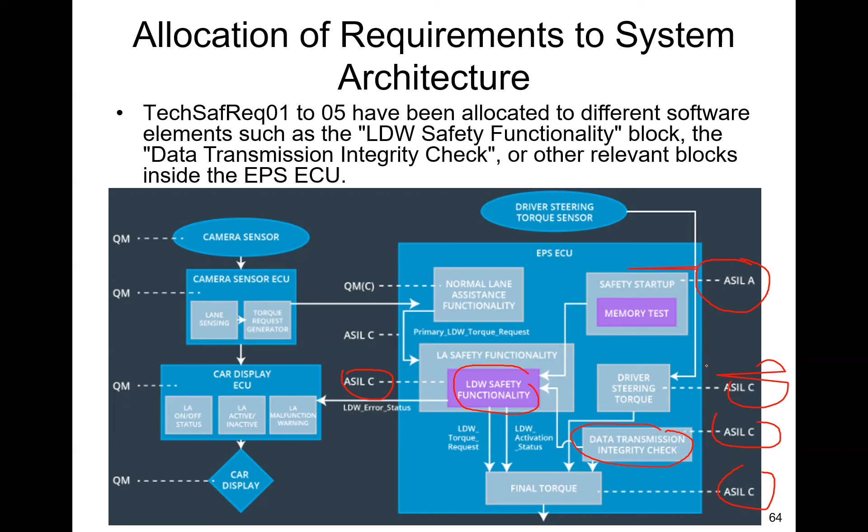So notable points: elements inherit the highest ASIL from the technical safety requirements. So if the same software element provides a functionality to ASIL C and ASIL B functions, the higher ASIL wins, so this software element is assigned ASIL C.

So if an element contains sub-elements with different ASILs, then both sub-elements will receive the highest ASIL, with some exceptions. If a failure in one sub-element will not affect the other sub-element, then the sub-elements can have different ASILs. So internal and external interfaces need to be clearly defined.

Finally, we have functional safety for hardware and software. This is at an even lower level after so much requirements engineering at the functional requirements and the technical requirements stages. Now we are ready to actually develop the hardware and software.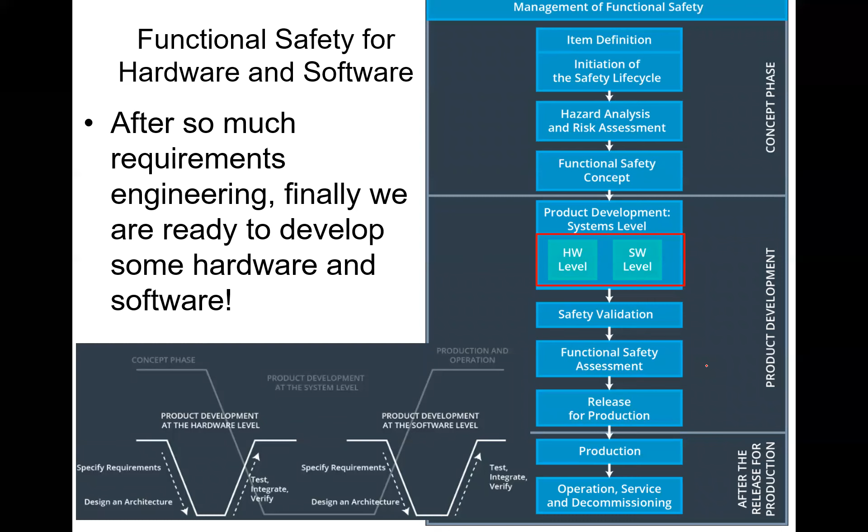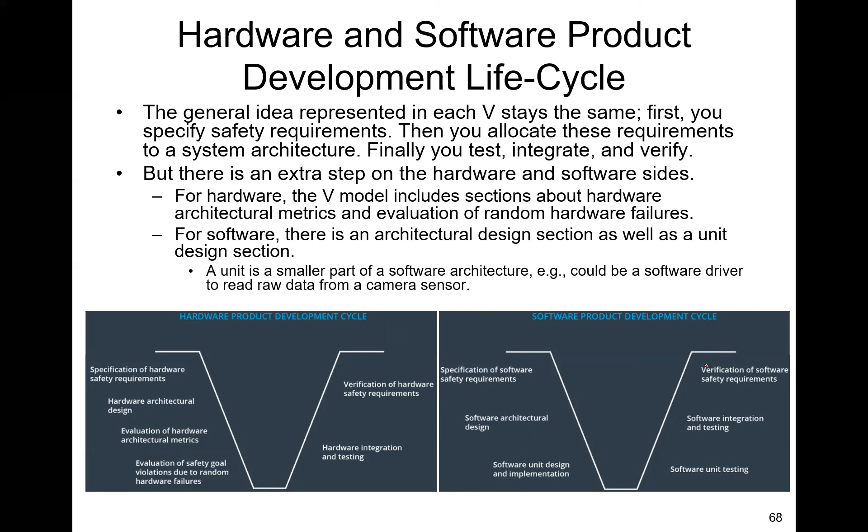So now we have two little V cycles. If you remember from the document we saw before, you have a larger V cycle and two smaller ones, one for hardware development, one for software development. For hardware, the V model includes sections about hardware architecture metrics and evaluation of random hardware failures. For software, there's an architecture design section as well as a unit design section. A unit is a smaller part of a software architecture, for example, it could be a software driver to read raw data from a camera sensor.

So programming languages popular in the automotive industry are C, C++, and MATLAB. MATLAB is the de facto standard for control software design, so it has automatic code generation to C and C++. MISRA C is a standard for safety critical applications, which defines defensive implementation techniques to prevent unsafe operations, language subsets, style guides, naming conventions, and so on. So if you're a programmer in the automotive industry, you're likely to have to respect this standard.

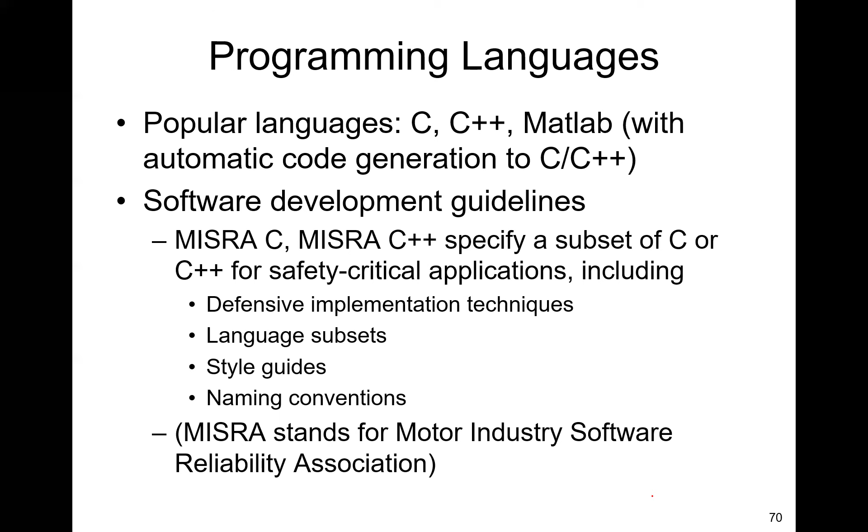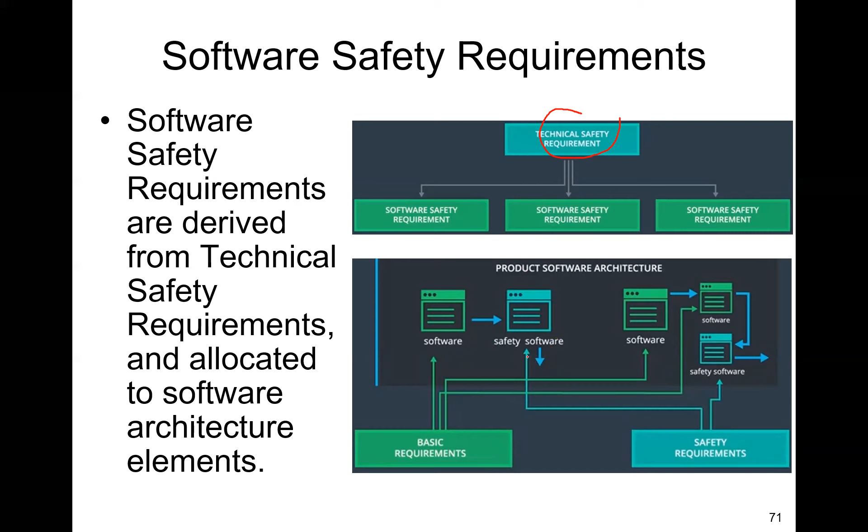So software safety requirements are derived from technical safety requirements. From one technical safety requirement, you may have multiple software safety requirements. And in the product software architecture, you may have different safety software blocks that actually implement the software safety requirements.

So here's the freedom from interference. This ensures that a failure in one software element does not spread and cause failure in other software elements that communicate with it. So the interferences include spatial or temporal, maybe between software elements with the same ASIL or different ASILs.

So here's freedom from interference between one ECU with ASIL-B elements and another ECU with ASIL-B, or one ECU with ASIL C and B component elements, and another ECU with ASIL A and D elements. So you should ensure non-interference among the different ECUs.

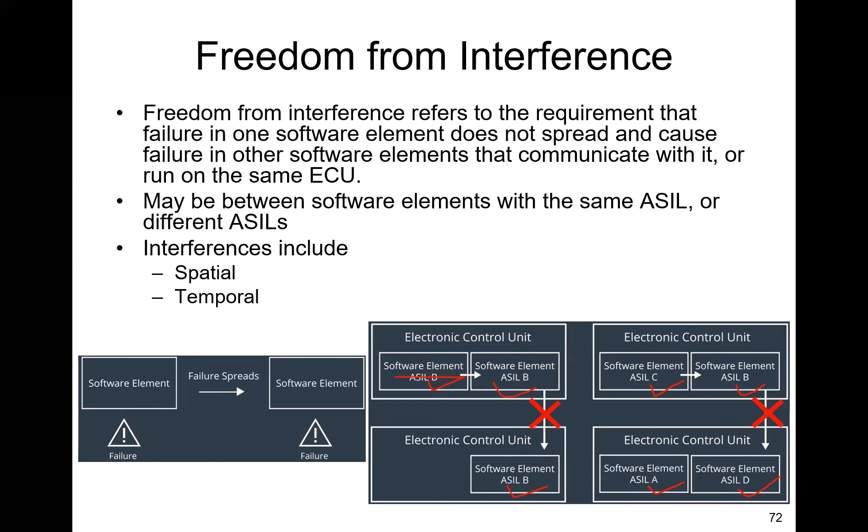Temporal interference: the top shows a blocking of execution due to shared data. This software element and this element share the same data. Therefore, when the lower priority thread is executing, it blocks execution of the higher priority thread due to the mutual exclusion.

In the middle, you may have a deadlock situation. Software element A is holding resource A and requesting resource B, and software element B is holding resource B and requesting resource A. Then you have a classic deadlock scenario.

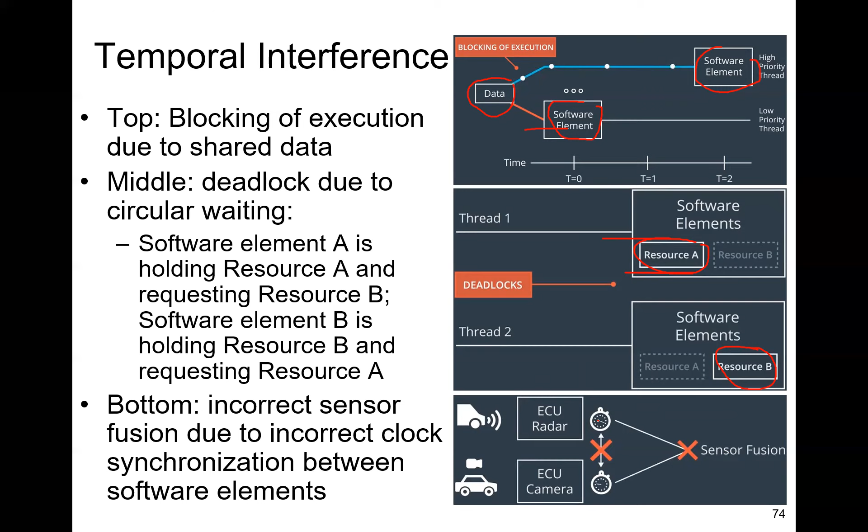More examples of temporal interference: incorrect allocation of execution time and incorrect execution sequence. For the top example, you see an alive supervision that checks the number of times a software element is executed in a time span.

So here we check for correct execution, which is 3 times in the time interval. Incorrect execution number 1 has only 2 executions - it's not frequent enough. The next one executes too frequently with 4 executions.

Both are incorrect. In the middle, you have deadline monitoring to check if a software element is executed before its deadline. A correct execution is when the software task finishes before the deadline, and an incorrect execution is when it exceeds the deadline.

Control flow monitoring checks that software elements are executed in the correct sequence. A correct execution is A, B, C, D, whereas an incorrect execution is A, Z, or B, C, D. So these are all examples of temporal interference.

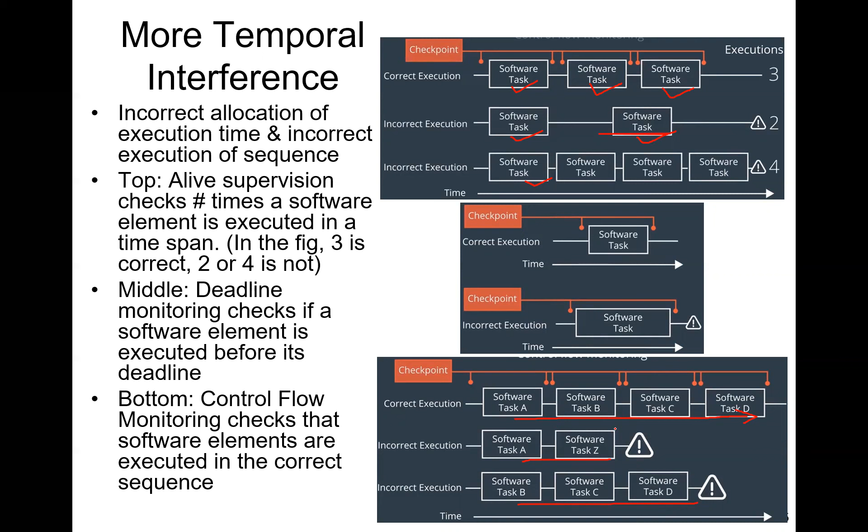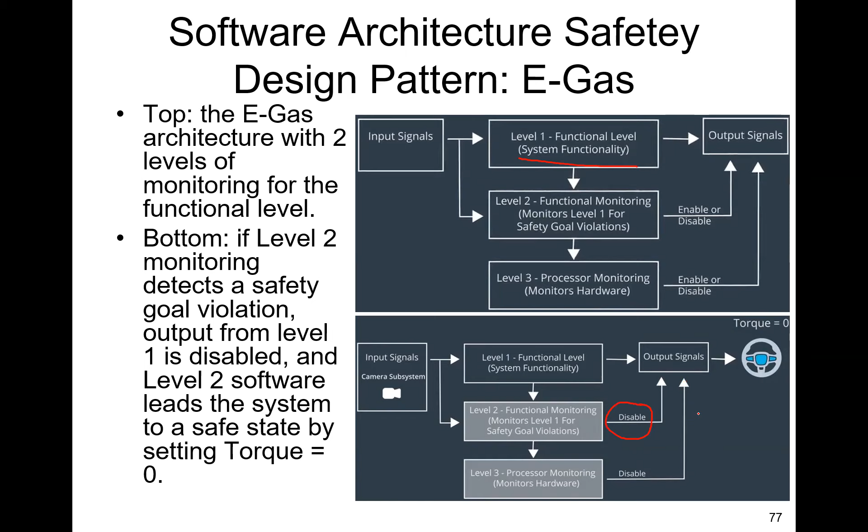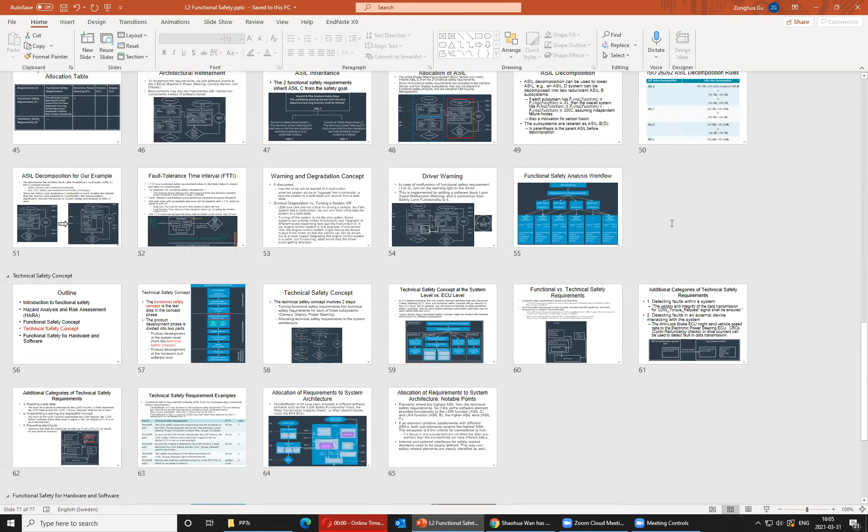Okay, so that's the end of the functional safety chapter. I went through this chapter pretty quickly. Any questions?

Hi, yeah? I don't have a question regarding a specific slide, but I just wanted to know - you have linked many other YouTube videos regarding functional safety requirements. I was just curious, do we have to go through all of them, or is your lecture enough for the exam? Can you please clarify this?

Anything I put in the additional reading section is optional. The only required reading is my PowerPoint slides and my lectures.

Okay, yeah, so for the functional safety, the tutorials are incomplete - they only put out 3, I think more are coming. The others are some full courses. I wouldn't expect you to go through all of them, it'll take you forever. So yeah, all of these links on the right are optional.

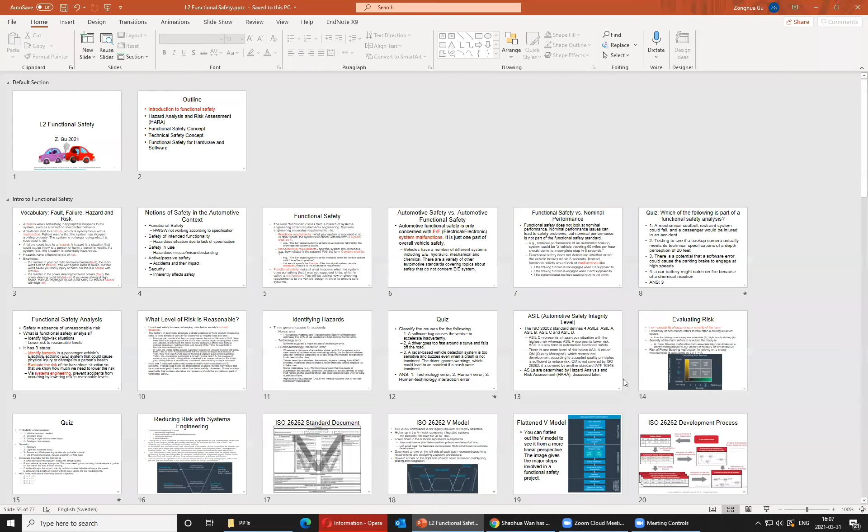For the particular lesson today, I think what's likely to be covered in the exam is the ASIL determination. So I may give you a scenario and let you determine the severity, exposure, controllability, and check the table for the ASIL level for it.

For the others, I think it's pretty much just knowledge that's difficult to give questions about. As long as you understand this table, things should be okay for the chapter. Okay, thank you so much. Yeah.